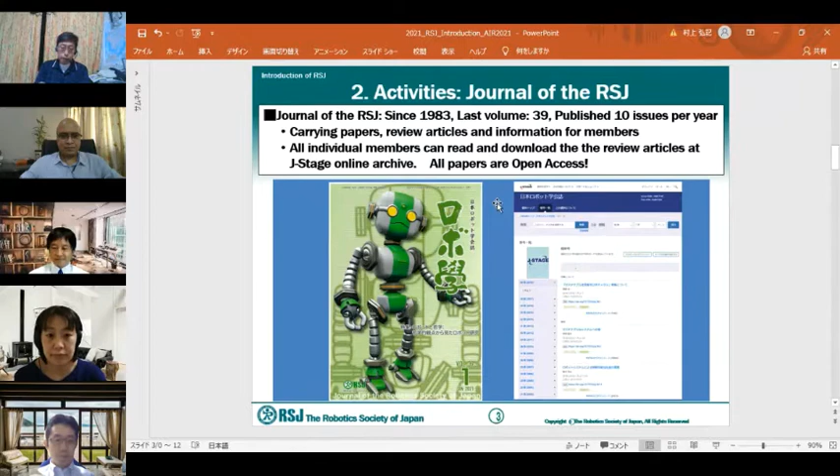Advanced Robotics, the International Journal of the Robotics Society of Japan, has been published since 1988, and is published by Taylor and Francis.

This journal is subscribed to by many libraries, so please use it for research on previous research. And the submission fee is free, and AR gets the impact factor, so please submit your research results.

The RSJ annual conference and collaborative symposium is held in Japan every year. But unfortunately, 2020 and 2021 became online conferences due to the influence of COVID-19.

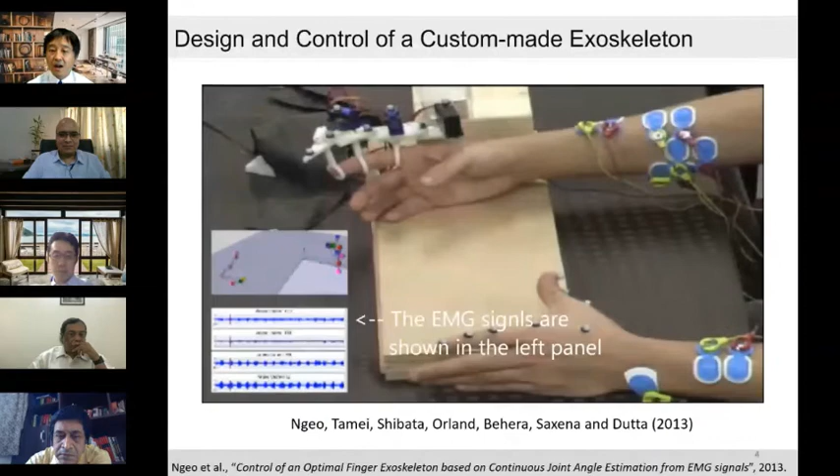This is a typical good example of our collaboration. We are good at working with EMG signal interpretation, and Professor Dutta's team was good at producing this 3D printed finger exoskeleton for rehabilitation. We collaborated together very well, and we also printed this exoskeleton at NAIST, where I was an associate professor at the time. In that way, we did a very good collaboration. I was really lucky. Thank you very much, Ashish, again.

I hope many of you know Yaskawa Electric Corp, since it also has a division in India, and they hold some of the best industrial robot cells, with one of the best market shares in the world. Kyutech was founded by the Yaskawa family, 100 to 110 years ago, which is why I'm telling this. Yaskawa's headquarters is in Kitakyushu City, and of course we collaborate very well with them.

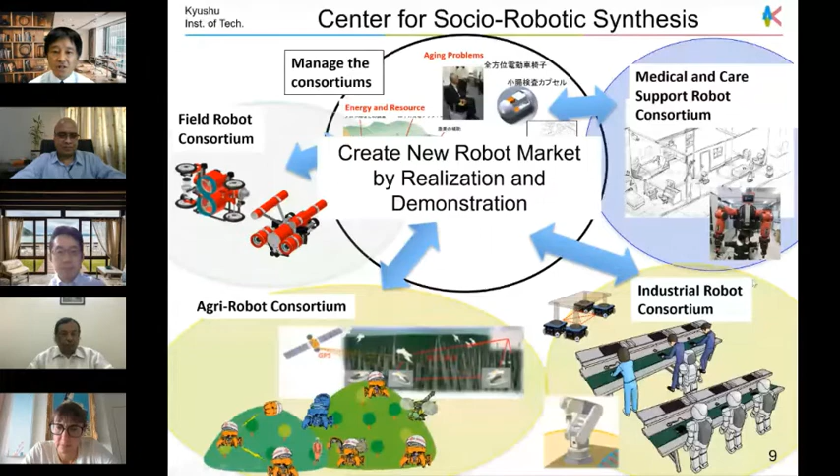Unfortunately, I don't have time to explain them in detail. Just I'd like to mention, our center has been working with holding many different types of competitions. This is actually a world competition that's also organized very well, strongly initiated and supported by Professor Asada.

That's Robocup, and we are good at football playing robots. But also here I'd like to introduce our service robot briefly. Hibikino-Musashi@Home is a student circle, and they're really strong. This is a robot given by Toyota, and the student team has been working with intelligence, and actually they won 3 times: 2 in this Robocup at Home, and 1 in World Robot Summit conducted by a Japanese ministry.

Let me move on to this slide. Due to the significant problem of super aging in Japan, we are having a shortage of caregivers and workers in many areas. This slide focuses on healthcare, and different robots and technologies are needed for different health conditions. You see wearable sensors, walking assist devices, motor learning assist, dressing assist, advanced home life support. Shibata Laboratory has been working on most of these robots and intelligent robotics.

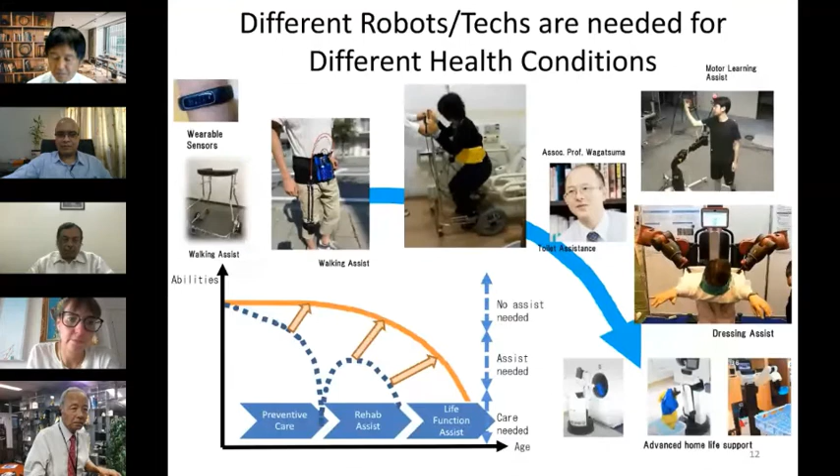My recent talks are actually available on the net, so please visit these sites. One was a first webinar given for TRS, and my title was Robots for Assisted Living. Another one was an opening talk I gave for the ICRA 2021 workshop entitled Learning for Caregiving Robots.

Now please visit. So I just want to finish my part by introducing the young researchers, the young promising researchers. One researcher is Professor Shuhei Ikemoto, and actually he was a student of Professor Asada in the past, and also Professor Hosoda, and joined Kyutech 2 years back.

He's interested in biological inspired systems and robotics. You can see these robots, pneumatic actuated robots. He's interested in these bio-inspired systems, and he's developing robots and algorithms that work for realistic, complicated tasks. Actually, these movies are a relatively old, and he's already developed a very new, interesting, exciting robot already, but seemingly it's secret -- he didn't give me a new one. So please visit his website.

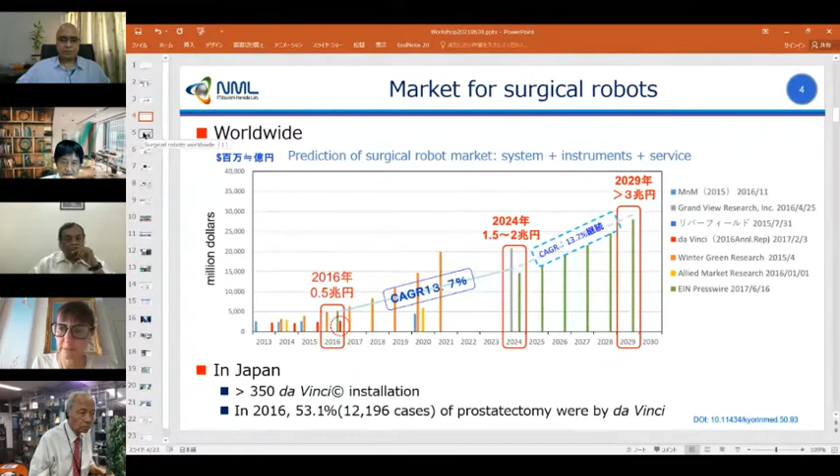Da Vinci is the most famous surgical robot, but there are many surgical robots clinically used worldwide. For example, this is the Mako Stryker for hip joint replacement and also knee joint replacement. These are also reimbursed in Japan.

This robot is for percutaneous coronary intervention, developed by a company named Corindus. But this was recently acquired by Siemens for $1.1 billion. It's a lot.

So starting a surgical robotics company is not such a bad thing. This has been approved by the Japanese authority and also installed in a Japanese hospital. This one is also a famous one called Senhance. Da Vinci is without haptics, but this one is with haptics.

This one is called the Hugo system, developed by Medtronic. Medtronic is one of the biggest companies in the healthcare industry, and it was great news for us that they decided to join this surgical robotic market.

There are also some new systems. This is by Auris Health for lung cancer applications, and this company was also acquired by Johnson & Johnson for $3.4 billion. This one is called the SPORT Surgical System by Titan Medical.

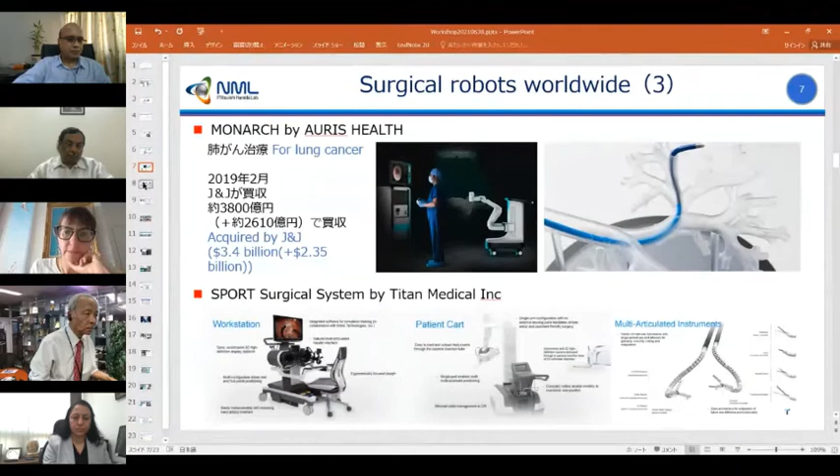Of course, we also have a long history in Japan for surgical robotics. There are some robots, for example this one is for liver surgery, and this one is for HIFU, high intensity focused ultrasound, for pancreas surgery without incision. And this one is a robot to hold a surgeon's hand, because in neurosurgery, operations can take 5 or 8 hours, so they developed a robot to hold their hand.

This one is by Keio University, designed to insert all robotic tools from one incision in the belly button; this type of surgery is common for cosmetic reasons. Olympus is also developing an AI-navigated endoscope system. And we also have a new company called Medicaroid, who recently announced their new robot called Hinotori. It's kind of like Da Vinci, but it's a Japanese original robotic surgery system.

Da Vinci is very famous, especially for its urological application. But this graph shows a trend for the procedure, and you see that the application in general surgery is increasing—for lung, liver, kidney, etc. And now Da Vinci is considered to be a platform for telesurgery.

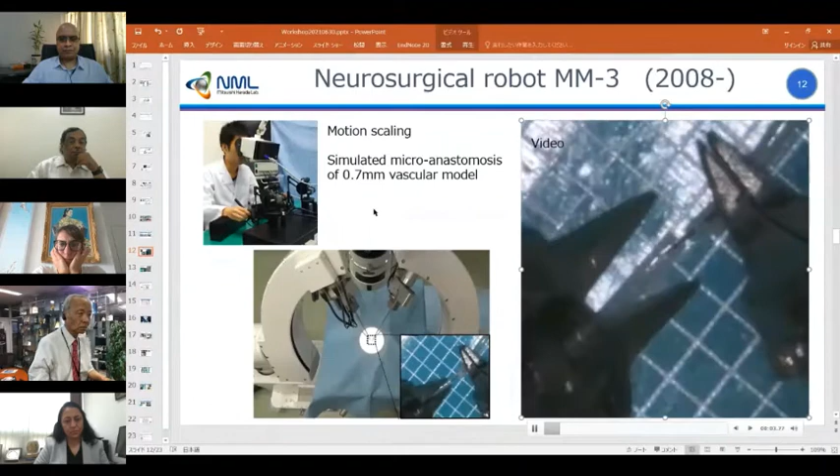We have been developing this microsurgical robotic system for microanastomosis using telemanipulation control. You see that this square is 1 millimeter, and even an engineering student can anastomose the 0.7 millimeter vascular models. This task is quite difficult even for an expert surgeon.

Today I also want to introduce our project called Bionic Humanoids Propelling New Industrial Revolution. It has already concluded, but it was a big project with a budget of $40 million US. In that project, we proposed high fidelity dummies equipped with sensors for quantifying surgical manipulation, and also for replacing or reducing trials on animals and patients.

We also developed the smart arm, a surgical robot to demonstrate that the bionic humanoid can accelerate the research and development of medical devices. So I want to show this video, and I hope you can hear it.

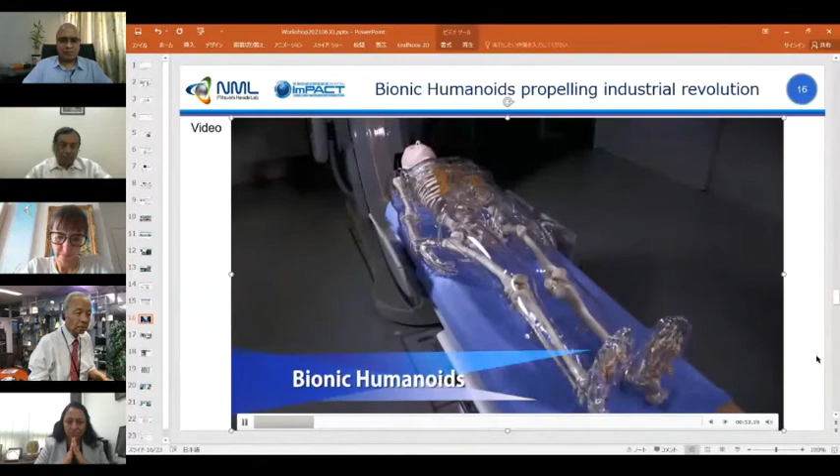So this is a summary of our project. I was program manager of this ImPACT project, and we proposed to develop dummies to quantify ambiguous sensory information to accelerate medicine-engineering collaboration. This is the bionic humanoid—maybe the term bionic can be misleading, but we propose to develop accurate dummies that can replace patients.

This is Professor Ayusawa, who was in charge of developing the bionic humanoid for eye surgery. This one is called Bionic Eye. In fact, it has been commercialized by Mitsui Chemical, so if you want, you can buy this to study the eye surgical robot. We successfully replicated the membrane in the eye ground, and also the eyeball's mechanical property.

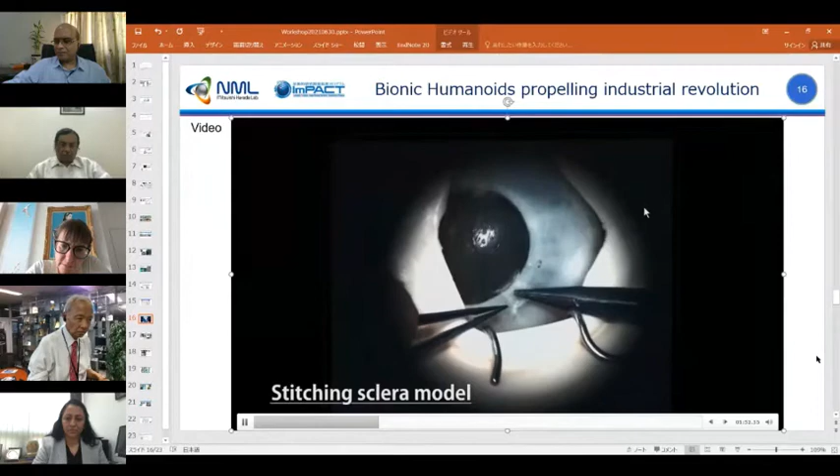This is an eye surgeon demonstrating the surgery, using the sclera model that duplicates the mechanical property of the human eyeball and sclera. This is video of another surgery to remove the membrane on the eye ground, where we replicated the mechanical property of the eye ground.

As he says, in eye surgery the patient is awake, so you cannot say 'oops,' or tell young surgeons that it's a mistake.

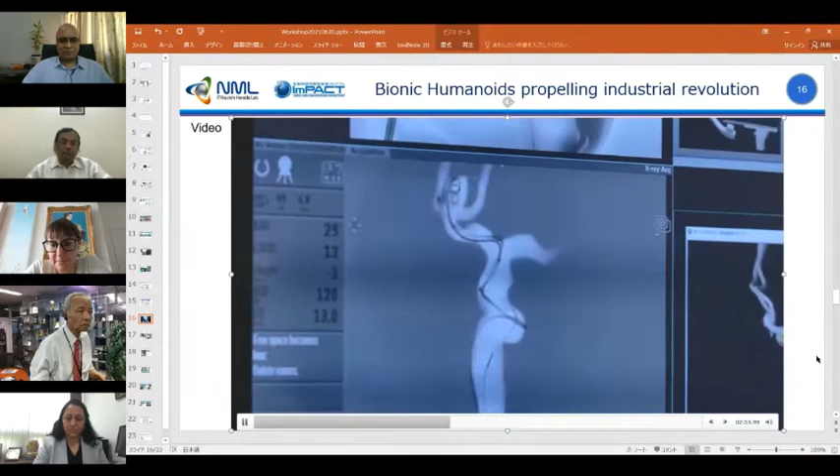So it's very difficult to educate or train young surgeons. He said the eye surgical model is helpful, and this model is for vascular surgery, for catheter therapy. We measure the mechanical property of human vessels, then replicate that property using artificial materials. We placed several sensors along the vascular networks so the force applied on the vascular wall can be detected, including ultrasound displacement sensors and pressure sensors. He's a surgeon, and he says this model is quite similar to the patient in terms of tactile feedback. This model can be used for training and also for the development of catheter robots.

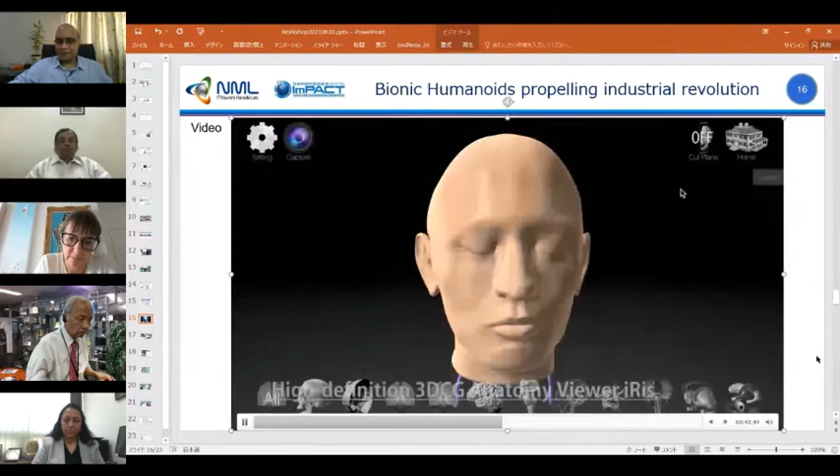This is how we measure the biomechanical properties of human organs, not only the mechanical property but also the shapes. We also developed 3D anatomical models because MRI or CT are not precise enough to know the exact shape of the nerves or small structures in the brain. So we think our models have the highest definition.

This one is a Bionic Brain for the surgery of endonasal neurosurgery. This model was also commercialized by a professor, so if you want to buy it, you can get it. This is Professor Mitsuishi, and I belong to his laboratory.

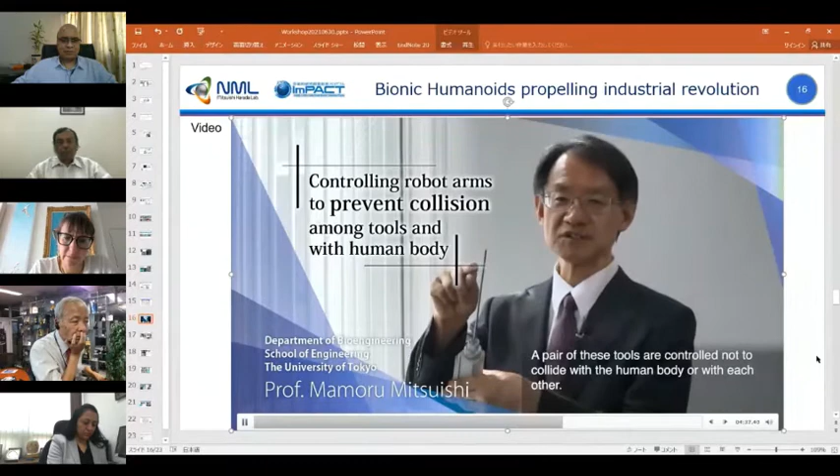We developed robots that can reach the brain tumor through the nostrils. He's a neurosurgeon, and he is operating. You see that one endoscope and two surgical robots are inserted from the nostril to reach the area that cannot be reached with straight tools. This demonstrates dura mater suturing. The dura mater needs to be sutured after the removal of the tumor. This is another type of user interface for co-manipulation.

Okay, so I stop here.

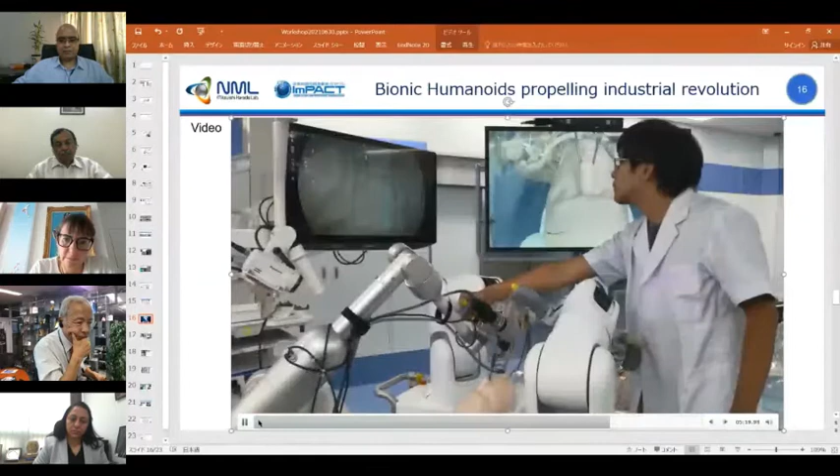So this is a smart arm shown in the video. This is the target area in the skull base, which is very difficult to reach with a straight tool. We developed a very small tool. This is a DaVinci tool, it's 8mm, and we developed a 3.5mm tool.

By changing the tools, we can use this smart arm for other surgical applications like vitreoretinal surgery and eye surgery, and also pediatric thoracoscopy for neonatal patients. This video demonstrates dura mater suturing. This is the final demonstration of the robot.

Thanks to the Bionic Brain, we can compare the performance between robotic suturing and suturing without robots. We found that the robots are more accurate and adequately efficient and safe.

Speaking something I cannot listen to. You cannot listen to me? Ashish, can you listen? Yeah, it's okay, I can hear. Oh yes, okay, so can that hear? My problem, sorry. Yeah, I am able to hear. Okay.

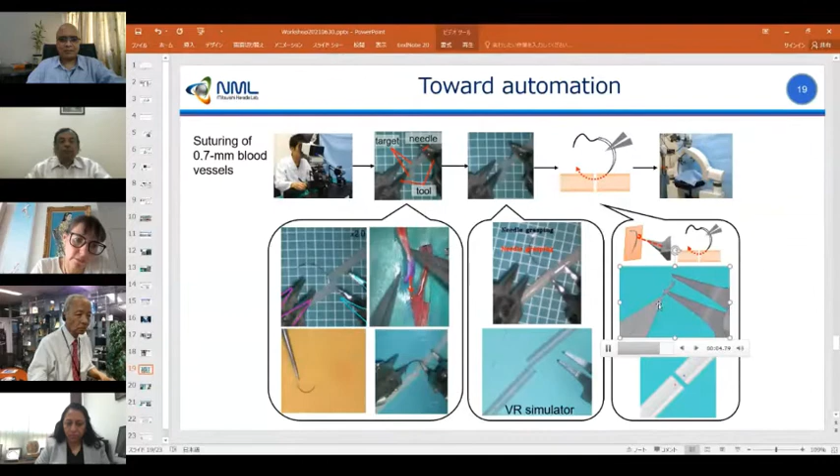We also developed and used AI to detect the phase of the surgery, for example, now you are grasping, now you are driving the needle, etc. Then we want to provide assistance, for example, to optimize the angle of the needle. This is the angle that the expert holds the needle, so we automatically rotate the left hand so that even a novice surgeon can hold the needle like an expert.

We are also developing a virtual reality simulator for vascular surgery, because it's difficult for us to collect real robotic data for AI to learn. So we use virtual reality data to collect data sets or to test our new control.

This one is for microanastomosis, and this one is for eye membrane peeling. We are also using reinforcement learning to optimize the peeling angle or peeling velocity.

Now we have been moving toward non-surgical applications as well. This is for pathology grossing robots, and this one is in collaboration with the Japanese Space Agency. We want to send this robot into the space station to perform animal dissection autonomously using AI, for example, to observe the progress of the dissection and to automate the robotic cutting.

And now it froze. So I think now my presentation is okay.

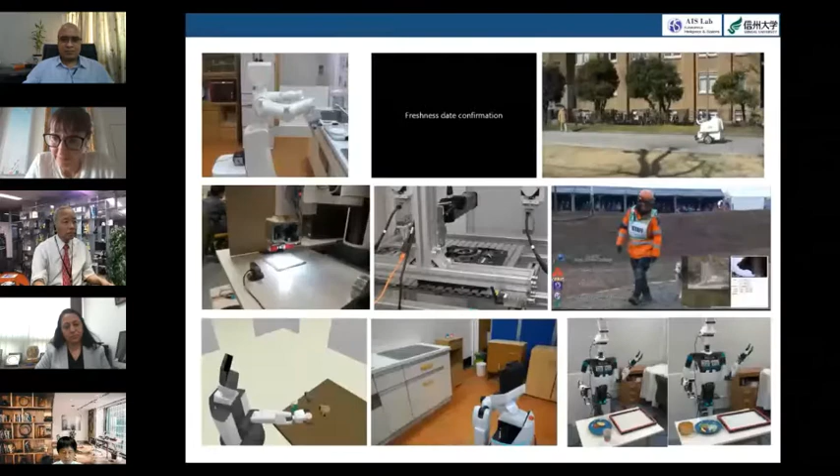The title of my talk today is Prediction, Estimation, and Learning for Deformable Object Manipulation. My main research field is intelligent robotics. This slide contains videos of some research results: housework support, mobility support, factory automation, and disaster response robotics.

Okay, sorry, I'll make the laser pointer. Can you see the pointer? Okay, yes. Another research area is motion planning and task planning, also my research field.

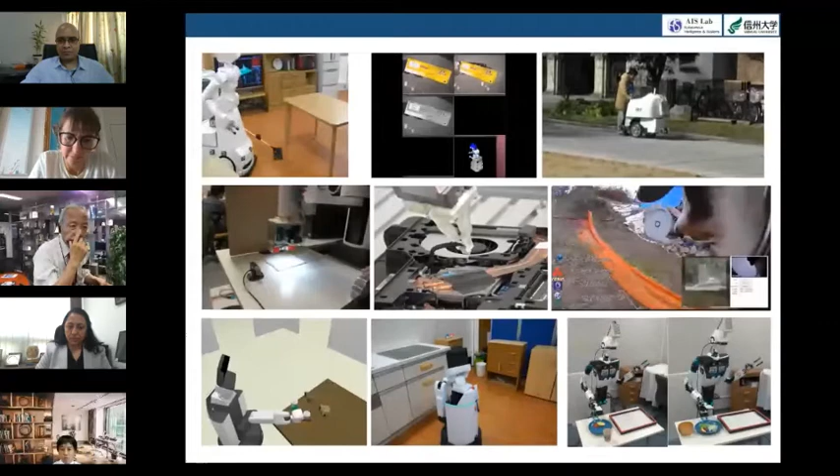Before getting into the main topic, let's organize object manipulation by autonomous robots. If the robot copes with rigid objects, the conventional approach is like this: the robot obtains object information in the real world, then inputs the results into a virtual world. After that, the robot plans and verifies its behavior in the virtual world, then executes the result in the real world. Here is a case we implemented more than 10 years ago. This is a conventional approach.

Well, this time we consider deformable object manipulation. If we use a virtual world, it's natural to think of using computer graphics technology. In CG, fiber and woven structure are simulated. This can be called a forward approach, and we may use this technology. However, the problem setting in robotics is different—robots have to estimate object state from sensor data. This is an inverse approach, I think. There are difficulties such as long processing time, low success rate depending on initial conditions, and so on. It's difficult, but very challenging and interesting, I think.

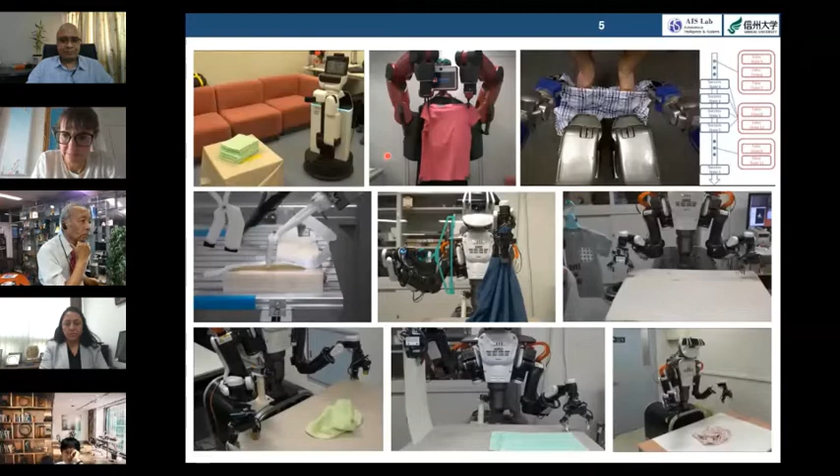So this slide shows some research results about deformable object manipulation: picking up a product without collapsing it, holding and dressing, cable wiring, putting a hanger in shirts, and so on. We have developed various functions and system integration for deformable object manipulation by autonomous robots like this.

Sorry, I misunderstood the concept of this workshop, but I will start a pretty technical talk from now. From here, I'll introduce our proposed approach in somewhat more detail.

First, we conceptualize deformable object manipulation as shown in this figure. Before manipulation, the goal state is given, then sensor data for the initial state are obtained. To realize the goal state, we must plan the manipulation procedure, including any midway state. We refer to this level as the plan scale. Then we carry out the planned procedure one manipulation at a time. We refer to this level as the manipulation scale.

To realize manipulation as conceptualized on the previous slide, we are building a dual level system as shown here. In the plan scale, overall motion plan, including midway state generation, is performed. In the manipulation scale, the cloth shape is predicted and controlled by appropriate perception and manipulation, which are an online process. Here, we introduce EMD-net—this is a modularized neural network: encode, manipulate, decode network.

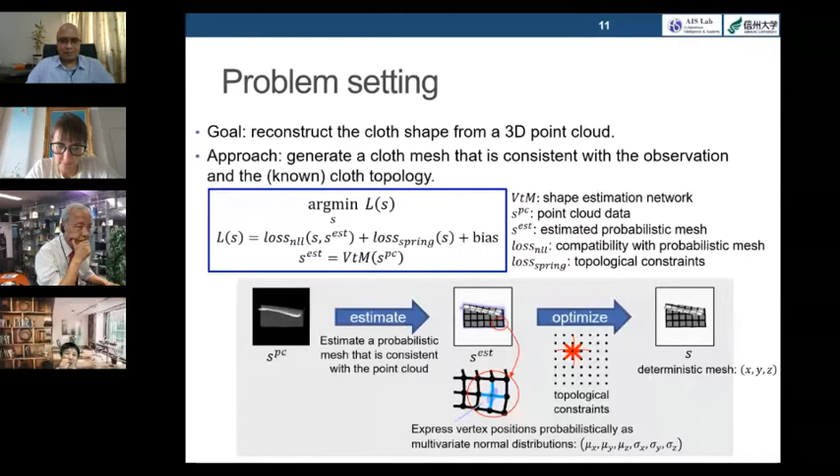First, we obtain 3D point cloud data, SPC, from the sensor. Then we convert the point cloud into a voxel representation. At this time, we boost Z coordinates to capture more height detail, such as cloth wrinkles.

Then we estimate the cloth shape probabilistically using the voxel to mesh network. We call this VtM net for short. The input of the VtM is the voxel representation, and its output is a probabilistic cloth mesh. The probabilistic mesh format describes vertex positions as 3D multivariate normal distributions.

Finally, we derive a deterministic estimate using a topological refinement procedure. By minimizing the vertex position negative log-likelihood, we ensure consistency with the observed shape. And by minimizing a topological loss, we improve the realism of the estimated shape.

Next, I will explain trajectory correction. The goal of trajectory correction is to make the manipulation outcome S sub n match the goal shape S star. To achieve this, we predict the outcome and adjust the trajectory so that the prediction matches the goal.

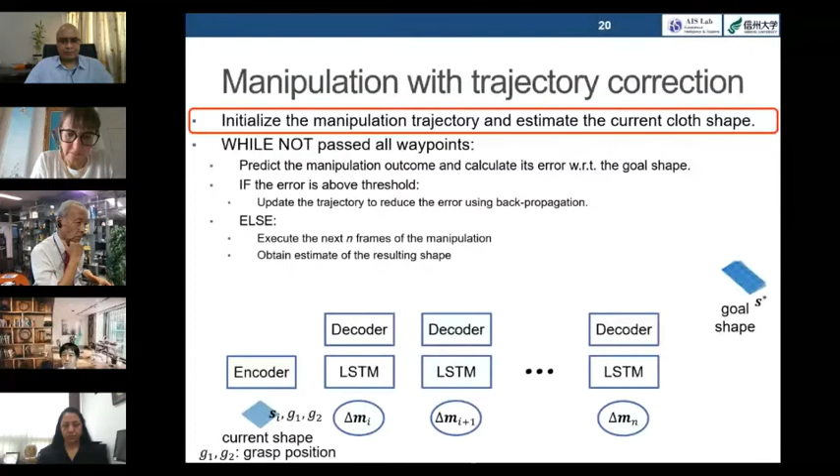Manipulation follows the following procedure. First, we predict the final manipulation outcome and calculate its error relative to the goal shape. If the error is above a threshold, we trigger trajectory correction, revising the trajectory to reduce the error using back propagation through a prediction network.

If the error is below the threshold, we execute the next n frames of the manipulation and obtain a new estimate of the resulting shape. By repeating this procedure until all waypoints of the trajectory are passed, we manipulate the target object into the goal shape.

I will introduce our experimental results. We evaluate our method on a cloth-folding task. We first evaluate all three functions in simulation, and then test the integrated system in hardware experiments. Our dataset consists of over 3,600 manipulation sequences generated using the ArcSim simulator.

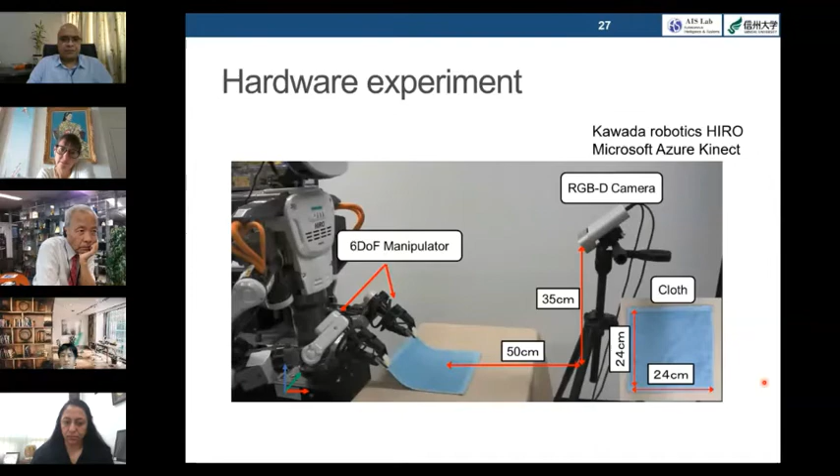I talk about deformable object manipulation by autonomous robots. Especially, I introduced a framework integrating shape estimation, shape prediction, and trajectory correction. As future work, I need a deep understanding of deformable object manipulation. Then we have to propose and verify the methods suitable for autonomous robots. That's all, thank you very much.

Thank you, Yamazaki Sensei. It was a very interesting talk, a technical talk. We have a lot of students and researchers also in the audience, so it's very good for everybody. Thank you for your interesting talk. It's a difficult topic, modeling deformable material, that's a difficult topic actually. So thank you for your talk again.

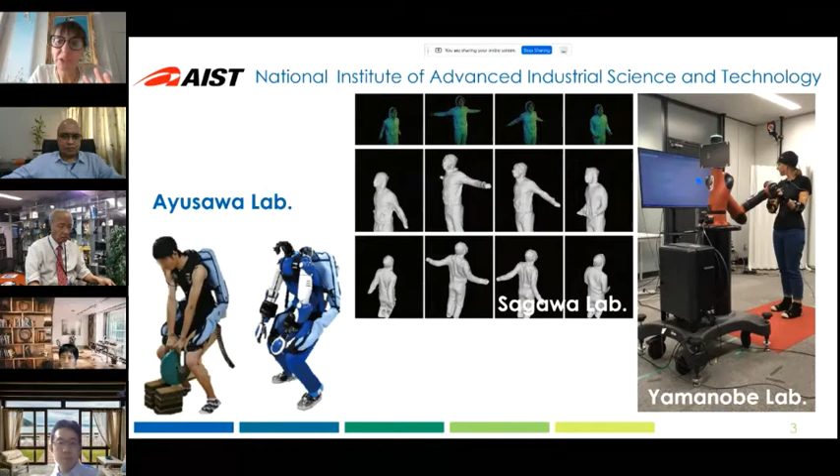So that's the main labs we have at AIST dealing with robotics. I wanted to introduce you very briefly some of our research activities that are related to many of these labs, and it starts with dynamics.

This is going to be a little bit technical, but very briefly: the idea is to work with the equations of motion. You should see an F here for external forces, but it's cut off. This equation of motion works for any kind of multi-body system, whether it's a car, truck, robot arm, humanoid robot, or the human.

The idea is, how can we use this equation of motion for the human? And in particular, how can we have access to dynamics information? The idea is to use movement.

Basically, we need to measure the movement of the system in 3D space, the movement of each individual part of the system with respect to each other, and then we need to measure forces. If we have access to this information, it's actually very easy now—we have multiple sensors that can do that, either expensive lab-grade motion capture devices, or as presented previously by Professor Yamazaki, Kinect, small IMU sensors, smartphones, and very cheap force sensors.

With this information, we can calculate the dynamics properties of the system. For example, we can measure the mass, the inertia tensor, and the position of the center of mass, the first moment of inertia. These can be applied to many different types of systems.

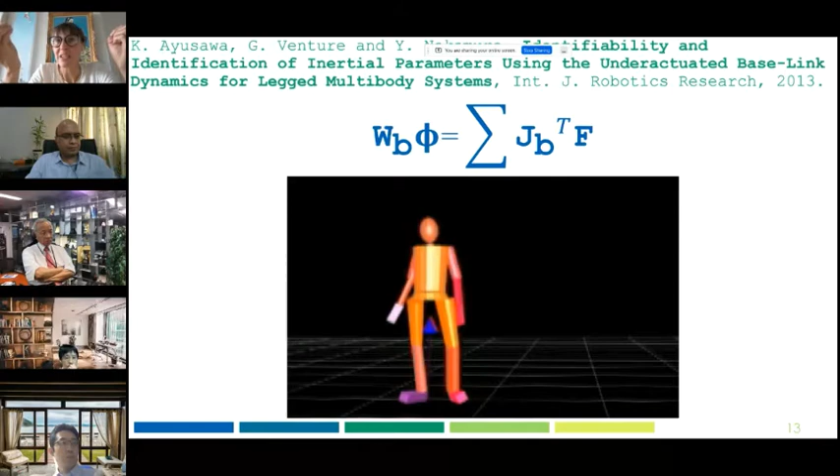Looking at what we did with humans, we created a similar way to systematically generate optimal exciting movements—we call this 'dance,' because it looks like the robot is trying to dance—to maximize the number of data points and the quality of these data points, so that we minimize the error on the identified values.

We have a robot that can generate all the movements fully by itself, and the algorithm takes into account balancing problems and self-collision problems. The robot stands on one foot, then moves to the other, generating all the movements required to minimize the error on the dynamics parameters we want to identify.

Some applications of these precise models are, for example, to get rid of force plates, because normally we need access to force information. But in many rehabilitation settings, actually measuring force is quite a problem, particularly in multi-contact conditions. For example, in sit-to-stand exercises, these systems have contact at the hands, contact at the buttock, and contact at the feet, and we need to calculate how much force is on each contact point.

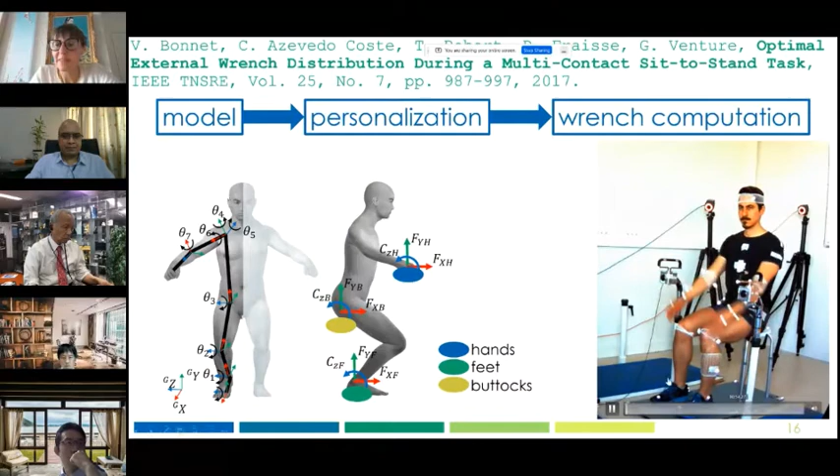This is an example here where we're doing the data optimization. Once this is done, the person is going to do some sit-to-stand task, basically standing up and sitting down, stand-to-sit and sit-to-stand tasks, which are often used in rehabilitation.

So that's basically some of the results. If we compare the forces that are measured, we can see that we have a fairly good ground reaction force estimation in all directions, even when they're very small. So we are fully equipped for full body dynamics analysis for both robots and humans.

The next thing we've been interested in is trying to generate novel models and to classify models from forces. I said forces might be difficult to measure in rehabilitation settings, but on the other hand, forces are quite easy to measure when we are sitting on a chair during the whole day, or seated on a wheelchair for our whole life. So we've been using force measurements to do classification of motion, motion recognition, and motion evaluation.

We've used it for sports activities and different types of exercises, including baseball pitching evaluation. We've also been doing wheelchair-ridden activity recognition, to try to provide feedback to patients and therapists about wheelchair-ridden patients and their activities during the whole day, week, or month, and about changes in their behaviors or movements.

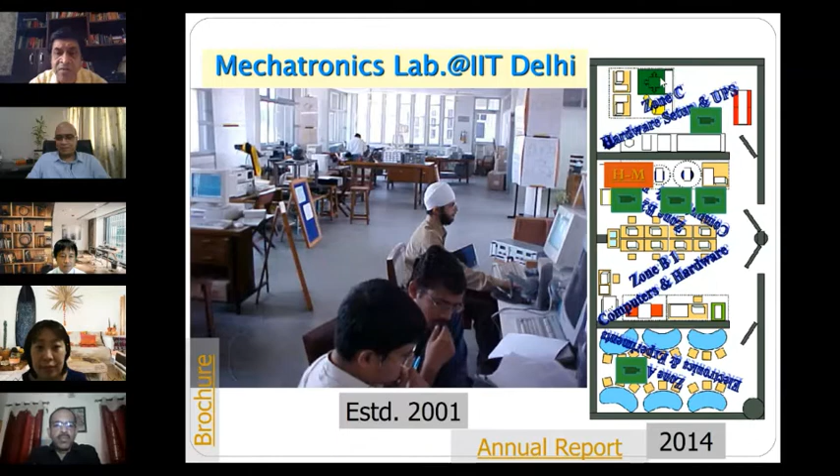To begin with my experience, as directed by Professor Dutta, I will talk about robotics at IIT Delhi. My experience with robotics at IIT is from 2001, when I started the mechatronics laboratory here.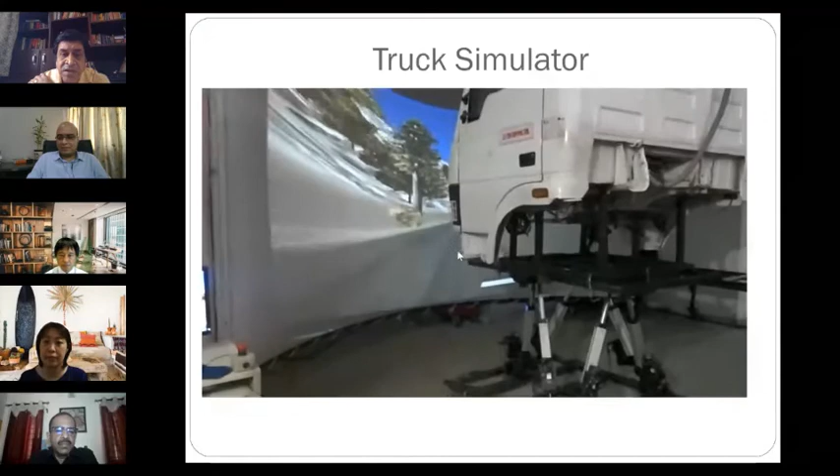I just wanted to show you a device, a simulator which we developed as a truck simulator for our Indian Army. This manipulator, the motion platform, is basically a Stewart platform, a very popular device used as a flight simulator. But here the target was a truck simulator. Complete kinematics, dynamics, and motion planning was done at IIT Delhi. Later it was taken to the site in Hyderabad, which is kind of south of India, and we did the integration there.

When we were developing that truck simulator, which was about 1 ton payload capacity, we were also playing with these kinematics to understand the control and other aspects. So we developed a small device for which we later found an application with our professor in biomedical engineering for etching implants. You can see how the laser spot has to be traced along the implant. So a nice offshoot application, and now this is so cute and so useful for education. We are making it available for other researchers outside IIT Delhi as well.

Then comes 2010. We had a sponsored program from our Atomic Research Center at Mumbai, and we created a program called Program for Autonomous Robotics. That was led by Professor Santanu Chaudhury, whom you met in the morning. He was a faculty at IIT Delhi, leading this activity where about 12 faculty and 20 students took part. We developed several technologies, and I will show you maybe 1 or 2 glimpses here. As part of our annual workshops, we also planned the Robotics Society from that time onward. We are very obliged to the Robotics Society of Japan as well as this project, which actually led to the formation of this society.

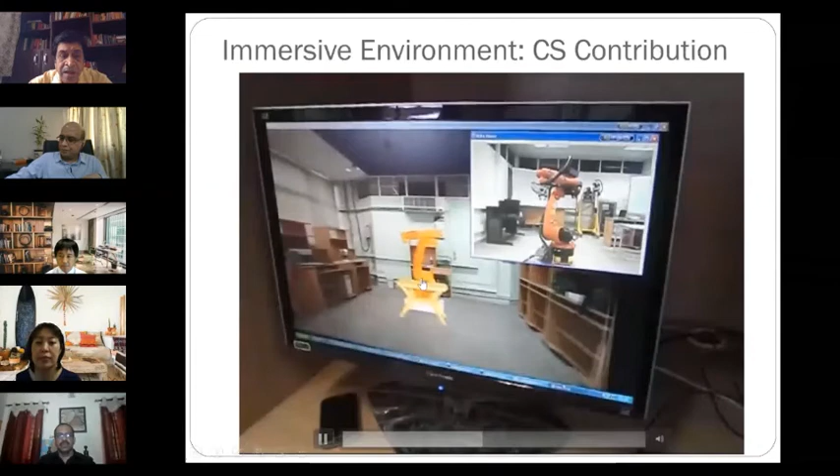This is one of the teleoperations in an immersive environment. Please watch the video. We are using a haptics device, as you can see, to manipulate a robot which is a little farther distance here on the top right. We are trying to control the virtual robot at the center of the screen, and then take care of the delays. These kinds of things have been attempted, so that whatever control is done on the virtual robot, the same signal goes into the real robot behind it. Now we are trying to adopt the technology, even though it was for nuclear applications at that point of time.

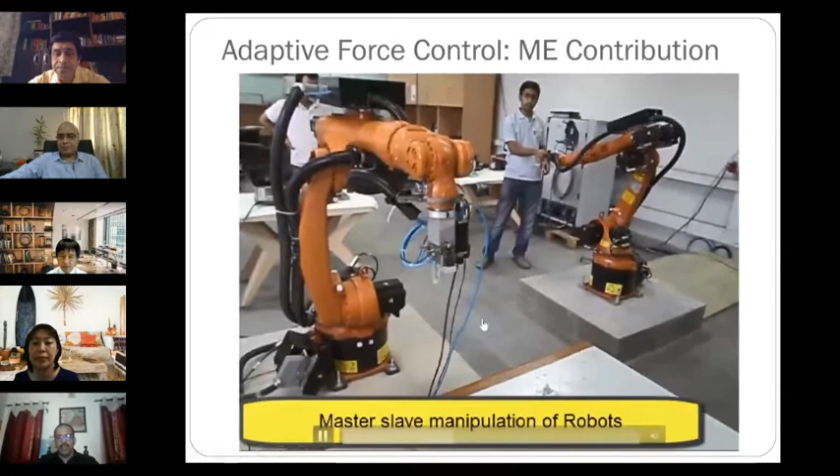Now we have very strong medical activities beginning here. I will share a few concepts or slides later on. In the manufacturing setup, assembly setup, we have this force-following robot. We know robots are typically used in cages, so we wanted to make the robots human-friendly. We are trying to take care of the current passing through the motors to have this kind of flexibility implemented. This uses 2 industrial robots, put in a master-slave manipulation mode, to understand various aspects of compliance in the robot.

We attempted the peg-in-hole operation by introducing force-torque sensors here, so that we can trace this circular hole and determine from the force plots what is the center of the hole based on the resistance coming, and then insert the component. Now the C part.

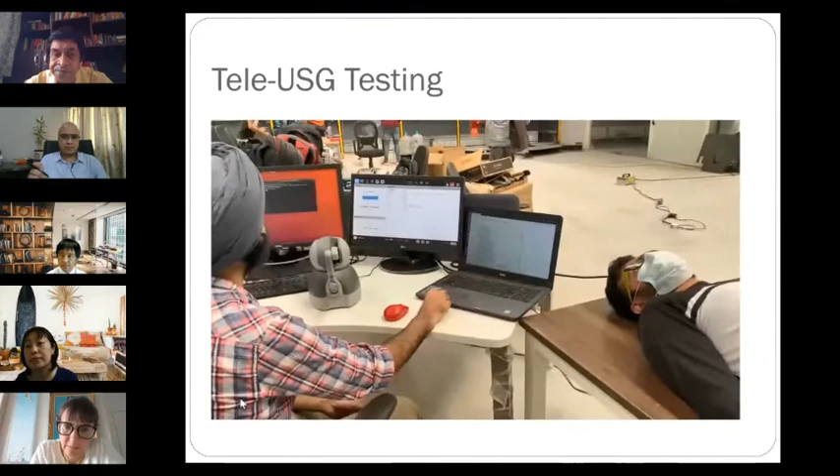One demonstration I wanted to show, which we have begun as part of this activity, is tele-ultrasound. This is the same haptics device you've seen at the beginning. So we have a cobot from Universal Robots, as you can see here, and a volunteer. The ultrasound probe is 3D printed because testing of the algorithms is still going on, and this is in the factory setup.

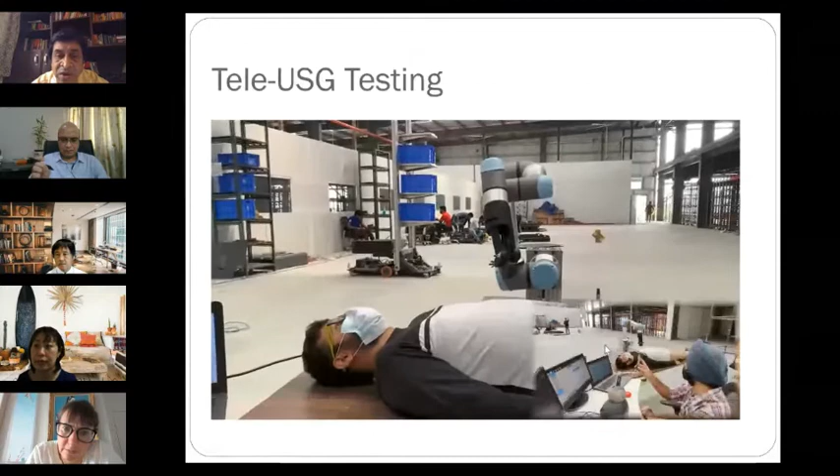Later on, it was taken to the hospital, and about 20 plus volunteers have been tested and have given their feedback. We are now in the next phase of improving it in terms of design, orientation, and the doctor's comfort, and so on. This will help us not only for the COVID situation but post-COVID also, to take this kind of healthcare diagnostics to remote places in the country as well.

This is just to mention that in India, particularly at IIT Delhi and other institutes, we have to put a lot of emphasis on education because we have a large young population. So this is my contribution towards that.

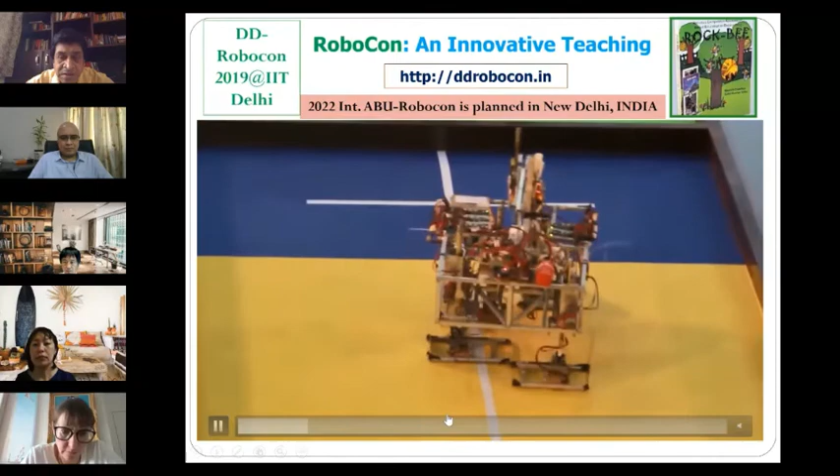The 2019 competition was held in Mongolia. Generally the theme of the game is taken from the hosting country, like 2022 will be from India. You can see the kind of challenges thrown at college students - they are enormous. This is a working robot the students have to build.

So to me, this includes all aspects of engineering typically learned in an undergraduate course, and that gives a lot of motivation to the students to learn what's next. That's the way we try to preach this very strongly.

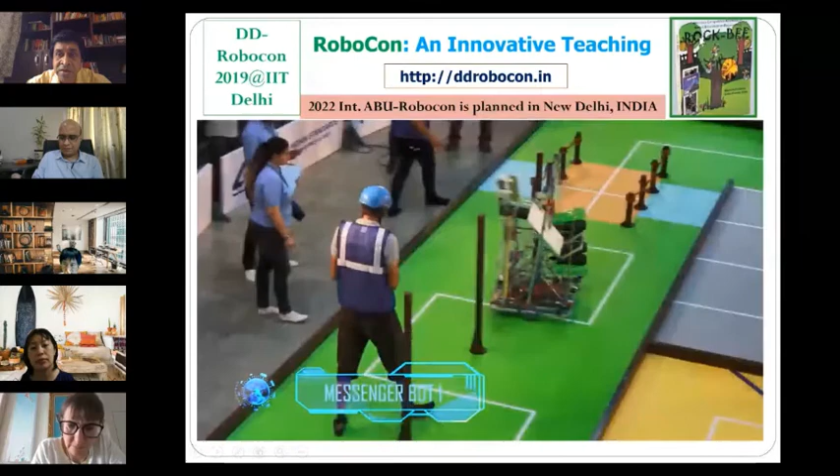In order to reach the masses, we wrote a small fiction book called ROCK-BEE - Robotics competition Knowledge-based education and Engineering. No equations here, just a story form. You can see how the robots are moving - all aspects of engineering, from concept to design to manufacturing to debugging, and at the end, strategy. The robot in front of you was a very popular team, but the other team, not so popular, won the final because of its strategy.

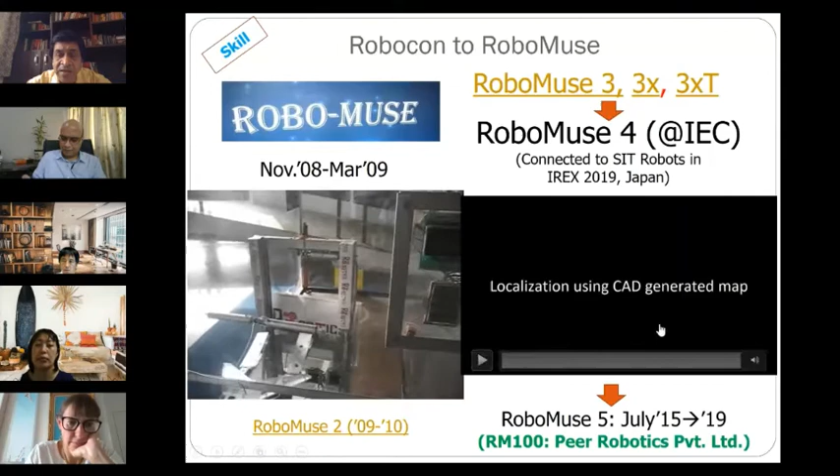And this is 2019 - we made it autonomous, as you can see on the right hand side. For your information, IREX 2019 in collaboration with Matsuhira, this robot had communication from the exhibition site in Tokyo to be able to control it. They could not fully control the robot, but certainly they could partially.

Successful, quite a nice collaboration. However, the journey continued, and in 2019, the same year, RoboMuse 5, another version of this robot, was adopted by a company in India called Peer Robotics, who claims this is a true collaborative robot, as you can see in this video. The base is the same RoboMuse 5, and you'll see towards the end.

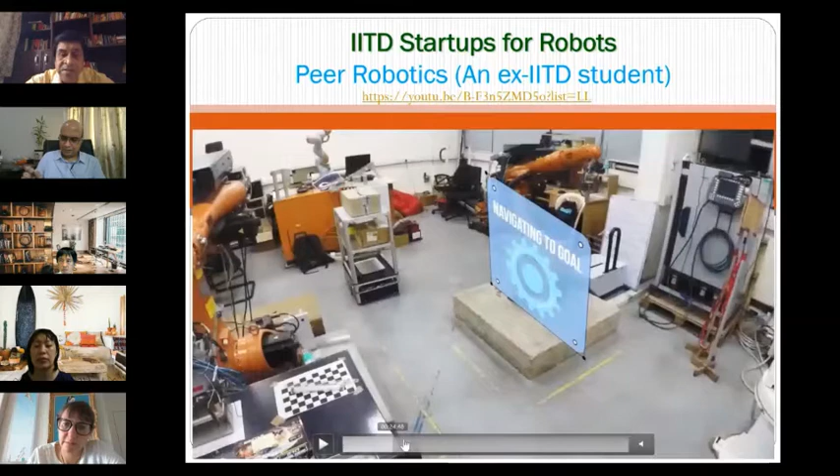I just wanted to fast forward - let's see if I can. So here you'll see someone coming and trying to push, but he will not put all his force here. Okay, let him.

You can put it in autonomous mode, or you can put it in collaborative mode. This is still autonomous mode - now it's switching to collaborative mode. The guy picks up the boxes, and here collaboration comes in - he's not exerting his whole effort, just showing the intention, and the robot is timing it. It's like a power steering system.

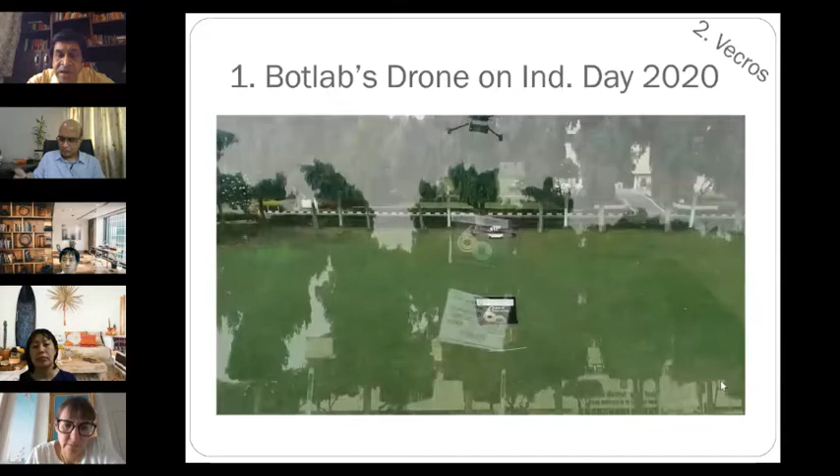So we have several other companies. There is one drone company on the campus - in fact, tomorrow they are going to demonstrate a formation of 50 drones. It's a challenge they've taken on for the entertainment and farming aspect.

This is our IIT Delhi campus. For those who could not visit yet, here's a very brief glimpse - this is an advertisement we made for our Diamond Jubilee celebration last year. This was on Independence Day, the 15th of August - you can see the flag hoisting activity happening there.

There is one more company, Vecros. So we interact with these startup companies too.

And in order to emphasize skill development, so in India we have the largest young population in the world, so we do take care of a lot of skills.

On my personal note, along with some collaborators, we have started a competition with Tezpur University, which we call self-driven, self-learning, and self-evaluating. There will be a paper on this at this conference, and these are some slides from there. For those who are interested, you can attend that session.

So with this, I conclude. I talked about mechatronics, I talked about RoboAnalyzer software, I talked about Robocon as an experience of skill-oriented learning, which I also call an innovative teaching mechanism, and ROC, RoboAnalyzer-based competition, as a skill development activity. Acknowledgement to all our friends, students, spouses, and thank you very much for your kind attention.

There seems to be some technical issue with the screen sharing and audio. The organizers troubleshoot, suggesting the speaker try using Chrome instead of Firefox, exit and rejoin, and try sharing only a single window or application instead of the full desktop. After several attempts, the presenter gets the screen share and audio working and confirms he can now be heard and seen.

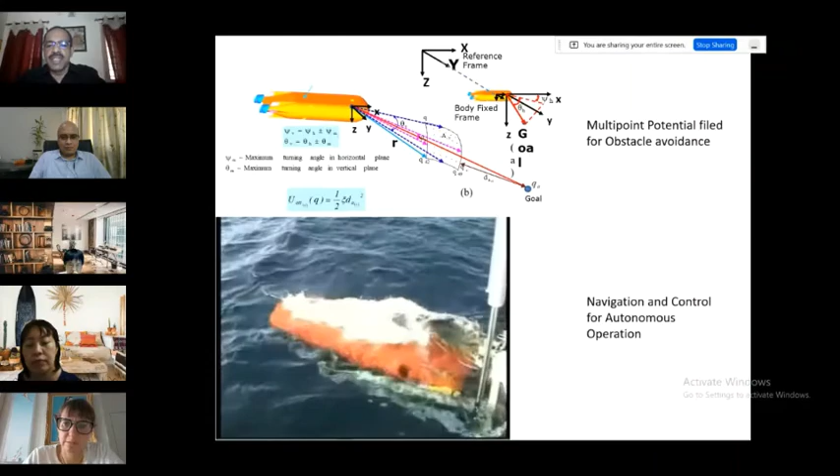So this was, and this has been published. What you are seeing on the video is the first sea trial of this robotic vehicle.

You can see that it is being deployed from the ship, and once it is deployed, it is fully autonomous operation. Once it is commanded to move underwater, it will go as per the designed paths, avoiding obstacles and following our improved line of sight method.

After that, we can collect it from the targets. This was the first trial, so very limited capabilities were tested, and this work is still going on. We are trying to improve the navigation and control aspects of these robots.

As part of the underwater robotic research, we came up with a new method for buoyancy variation. Most underwater systems use weight change as a buoyancy method, pumping water into or out of the vehicle to change buoyancy, which is a bit problematic because of seawater corrosion and other issues.

So we came up with a method of volume control, where the volume of the whole vehicle will be changed so that there will be a change in buoyancy.

As you can see in this figure, what we are using is bellows. The whole body of the robot is made up of metallic bellows, with electric motors inside that compress or expand the bellows.

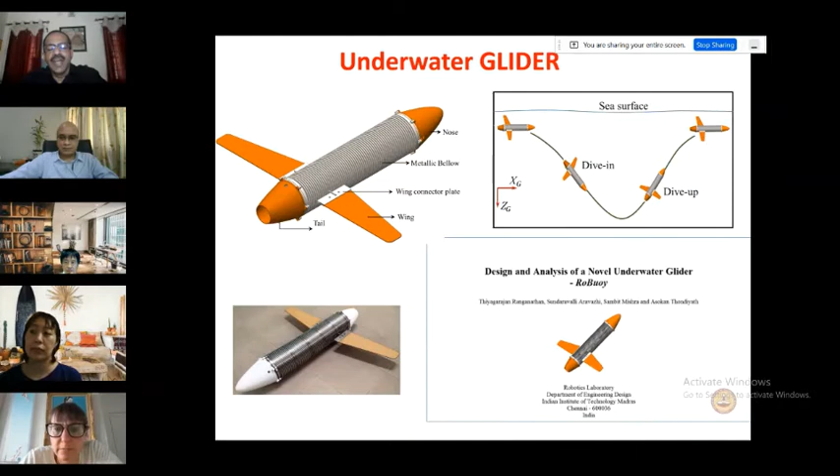So you get a change in volume, and whenever the volume changes, there is a decrease in buoyancy, so it starts going down, and when you change the volume again, it comes back up. This way, you get a sinusoidal motion for the glider, and the power required is very small. You don't need a thruster to do this.

What you are seeing here is the fabricated prototype, which we finally tested in the swimming pool to show that it actually works—the buoyancy variation is working.

Now we are converting this into a commercial product. We already set up a company to commercially develop it for commercial applications. It has high endurance because the power requirement is very low, and it is very silent—there is no thruster, so there is no disturbance to the surrounding medium. We hope this can be commercialized in a short span of time.

The second topic is medical rehabilitation robotics. Professor Kanako explained about the surgical robot and the importance of surgical robotics in the current era.

We designed a surgical robot with two master arms of 7 degrees of freedom and two slave arms of 7 degrees of freedom, with capabilities for haptic feedback and a 2D vision system.

We have a camera arm which carries the camera inside the body, and two slave arms which carry the surgical tool, controlled using a master robot, as you can see here. I'll get into the details later.

So this is the system diagram. You have the surgeon console where the surgeon sits and watches the video image, then controls the two master arms. Those master arm motions are captured, processed in the controller, and passed to the slave robot.

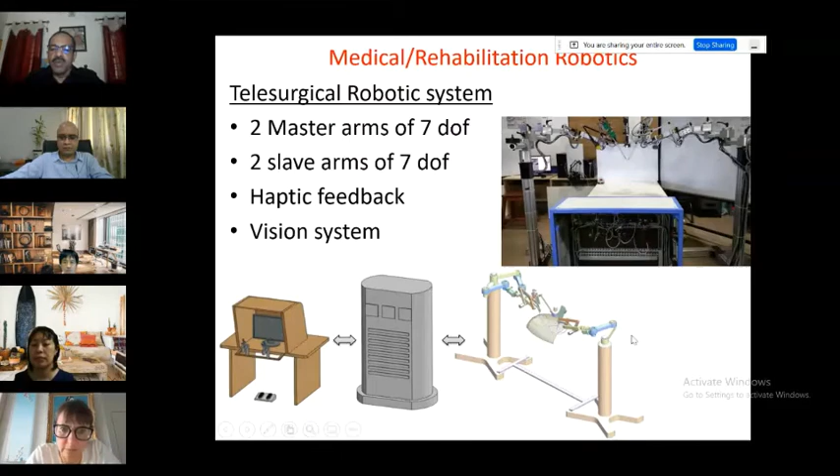The slave robot will be manipulating the surgical tool. This is the surgical tool we actually designed, our own patented design. As you can see, we have 4 motors to control the tool tip, giving 4 degrees of freedom at the tool tip. This part will go into the human body, and the tool tip can be manipulated using the master arm.

This is the final design for the surgical toolbox, and this is the master robot. It has 3 degrees of freedom for positioning and 3 degrees of freedom for orienting the tool. The surgeon will be holding onto this gripper, which is again a patented gripper design used for controlling the tool at the surgical site. We have 2 such master arms, and these motors also help us provide haptic feedback.

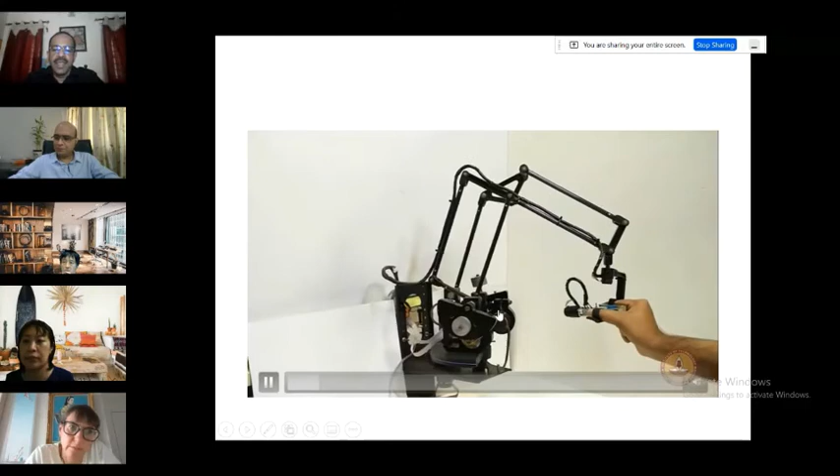I'll just show you the video of the whole system. This is the master robot, and you can see the person holding onto the grasper, which has all 6 degrees of freedom plus the grasping degree of freedom. All these motions will be captured using the encoders, and then you can find out the actual Cartesian motion of the grasper, which will be passed to the slave manipulator.

So you have 2 slave arms. This is the laboratory prototype, so it may not look very nice here, but when we convert this into a commercial product, we can make it much more attractive. This is the slave arm with a remote center of motion mechanism for getting the trocar point as the point of insertion. And then we have this surgical tool, which will go into the human body with all 7 degrees of freedom possible at the tool tip.

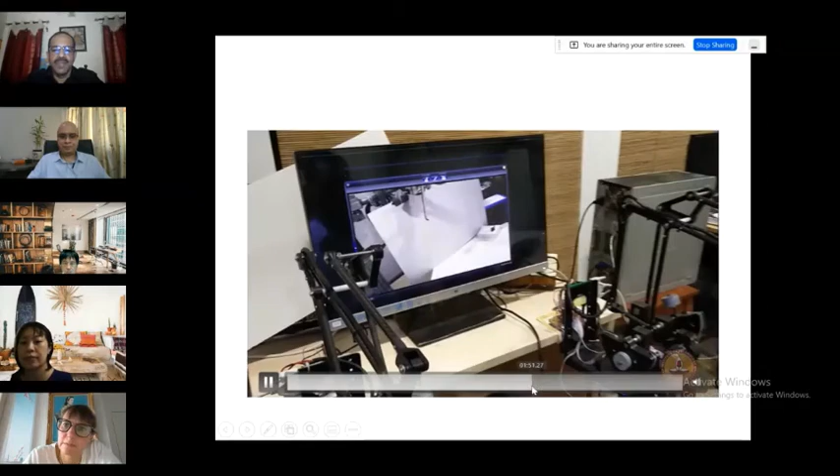And this is the master slave manipulation. So the master robot is being controlled, and the video image will appear on the screen, and then you can see that the slave robot or the tool can be manipulated as per the requirement by the operator. So this is a complete master slave tele manipulation.

So the tooltip transmission is through cable. You can see that the motors are all at the distal ends, and only this part will be inside the body, allowing very fine manipulation of the tool at the surgical site. We are now converting this into a commercial product, and with the help of the Technology Innovation Hub, or the Robotics Center at IIT Madras, we are planning to have a commercial product designed and developed in the future.

Just to show you, we have also worked on active hand rehabilitation. This is a simple device with a single motor for controlling the fingers. So those who are having difficulty moving their fingers because of some neurological disorder, this device can be used for controlling the fingers.

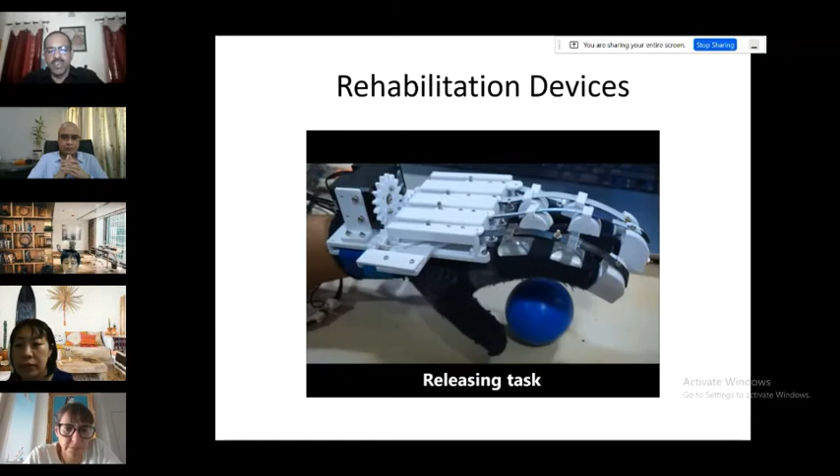Now, depending on whether we want it remotely operated or programmed, both are possible, or we can use the other hand as a control device. So there are multiple possibilities, and again we can develop this in a commercial way at a later stage.

The other important work we have taken up in the recent past is the design of multimodal robots for field and industrial applications. Multimodal robots are capable of multiple modes of locomotion, grasping, and manipulation. As you know, any industrial mobile manipulator requires the capability of mobility, manipulation, and grasping. These 3 things need to be there for any mobile manipulation.

Most of the existing or commercially available industrial mobile manipulators are actually a combination of these 3 - you'll be having a manipulator, a mobile platform, and then a grasper attached to it.

Did we lose him? We have lost him, it looks like. Professor Asokan, can you hear us?

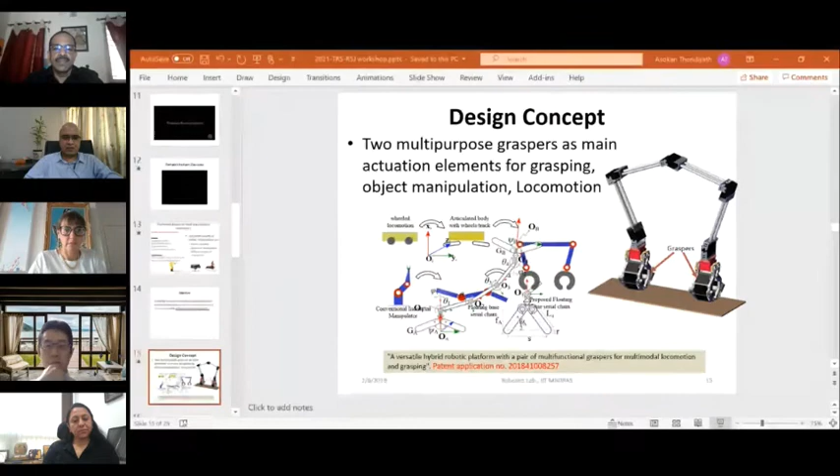Your slide is not changing. Oops. It's not changing now? Slide number 15, but not in full screen. Now we see slide number 19. Yeah, that is the one I am using. So can you see the video? No sir, we are still looking at the PowerPoint with the left side preview and the slide. Maybe within this you can play. Come out of the slideshow. Yeah, here only if you can play. Is it visible? Yes.

So we can see that now it's actually in a wheeled locomotion mode. This mode can be changed to grasping and locomotion, so you can actually hold an object and then do the locomotion. So you can do object manipulation, grasping, and locomotion. That is the first mode of operation.

And then we modified this to get the next one, the brachiation motion. Brachiation is where you hold one object using one grasper, and the other grasper can actuate to hold on to the next object. So we'll be able to get a brachiation motion using this mechanism. Grasping and brachiation can be achieved using this method.

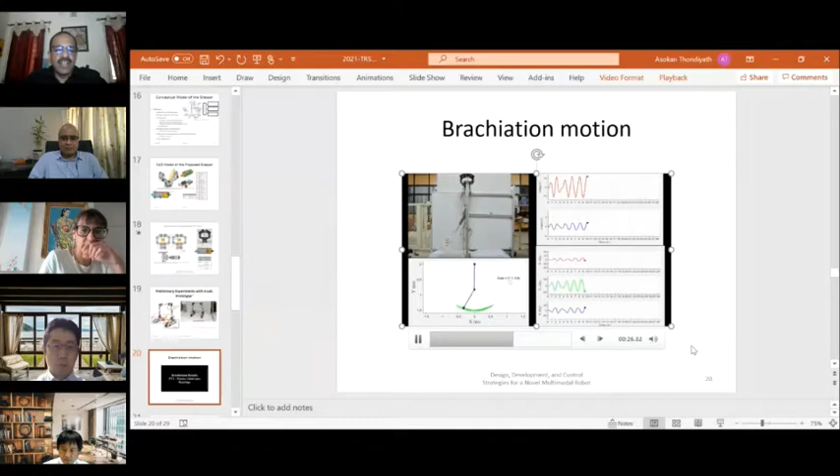And the last one we can do with this is the walking motion. You can make this into a walking mode. In walking mode, we allow the robot to stand on one leg and change its center of motion. By controlling the motion of the center, the other leg can be moved to the next position, and then we can have a walking motion for this.

So all the locomotion modes of rolling, wheeled locomotion, walking, or brachiation can be achieved along with the grasping capabilities. So grasping, manipulation, and locomotion capabilities are combined into a single system. This is further being developed to get a full walking motion. We are still in the process of developing it, and once we complete this in a full product, there will be a lot of utility for it in industrial applications.

Moving on to the next topic, aerial robotics. Most people do the standard quadrotor design, but what we have done here is a different design for the quadrotor to increase endurance or reduce the size of the robot with the same capabilities as other designs. We call this a vertically offset overlapping propulsion system, where the rotor wings actually overlap one over the other, so we can have an increased diameter for the propeller and get more power for travel. That is how we designed this quadrotor to improve the endurance.

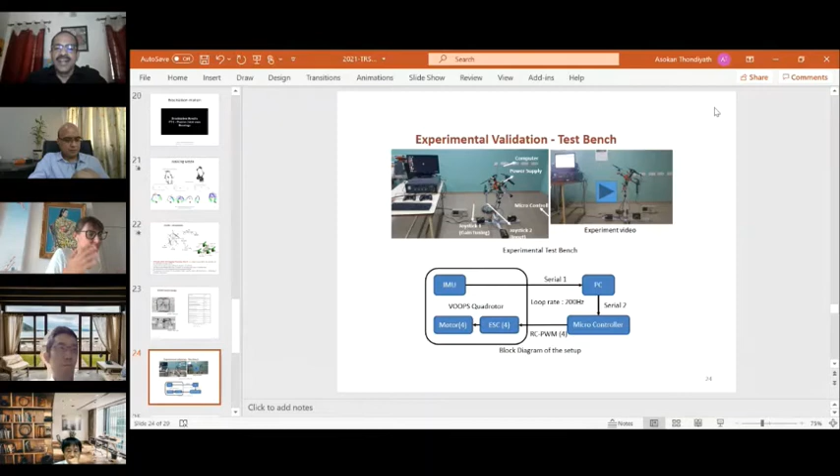We did trials within the lab for testing the losses, and finally did a test on the ground to show the capability of the quadrotor. We finally proved that this can increase the endurance. As you can see here, it's carrying a payload, showing that the payload can actually be increased by having this mechanism.

Before concluding, let me present some other related work in the area of quadrotors. In guidance, navigation, and control, this is from the lab of Professor Satadal Ghosh in the aerospace department, who is working on planning and motion control of aerial robots. This particular work shows obstacle avoidance and dynamic collision avoidance of multiple quadrotors—when multiple quadrotors are deployed, how can they avoid dynamic collision. This work relates to offline motion planning and online reactive motion planning to avoid obstacles.

This is additional work on path planning, showing target localization in 2D and 3D environments, as well as landing on a fixed or mobile platform. If a rotor aircraft has to land on a moving platform, what kind of control strategies need to be employed and developed? This work primarily looks at the landing issues.

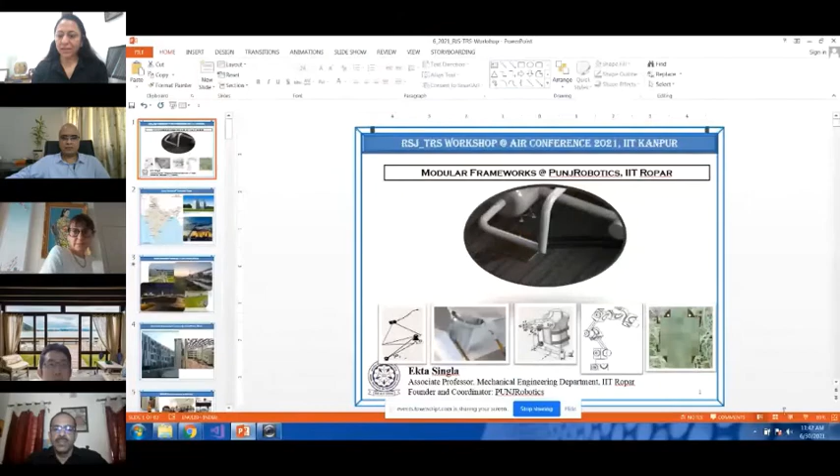Thank you very much, Professor Ashish Dutta, and everybody. A very good morning to all the Indian participants, and a very good afternoon to all our Japanese friends. It is certainly an opportunity, and I'm sure it will be great to have this sharing with you, and the rest of the 3 days will be very effectively utilized. IIT Ropar is a relatively new IIT in India, around 13 years now, so we call it a second generation IIT—relatively new compared to the other 3 speakers from Madras, Delhi, and Kanpur. That is why I've used 2 or 3 extra slides to advertise the institute, because I would like people to come here.

In totality, I'll be speaking about the umbrella PunjRobotics. That was one initiative because it was a recently established institute. When we had only 7 to 8 faculty members in the Department of Mechanical Engineering, I never found anybody who was really working exactly in robotics.

So in 2016, with the help of our RSI members themselves, we have established PunjRobotics here, which is a platform, and I'll be speaking about it, particularly the research areas related to the modular concepts we are focusing on. Of course, there are many other directions in which students and faculty members are working, but I'll just be touching upon a few.

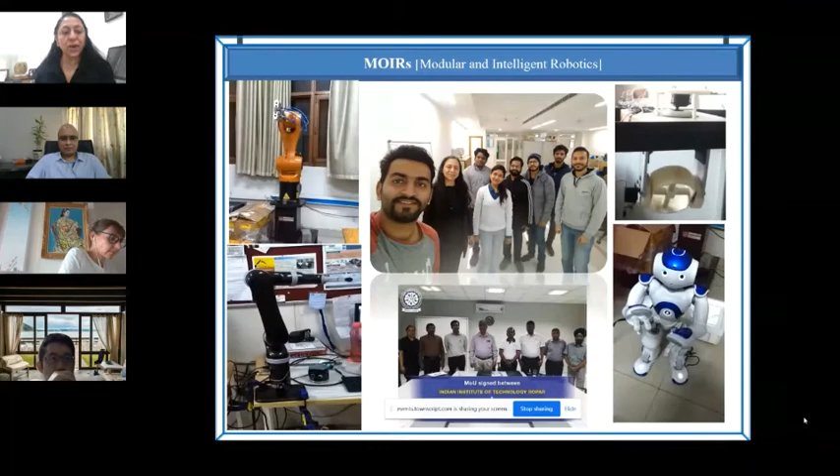Before that, about the location—I'll advertise a little more about the institute, because for our international participants, particularly the speakers, another reason you must visit Ropar, which is less likely to be popular, is that this is one of the biggest sites belonging to the Indus Valley civilization, and we have a museum here. I'm sure you'd like to add it to your next visit plans.

There are many tourism locations around, including the Golden Temple at Amritsar. More than that, we are very fortunate to have 10 national labs and institutes nearby, within an area of 30 to 40 kilometers, which helps us develop collaborations and interdisciplinary work both in medical and materials fields at a very good pace. That is why we have very good rankings, both nationally and internationally.

About Punch Robotics: in 2016, when we found that people were working in distinct areas with some idea about robotics but not knowing exactly where to start, it was important to club them together. That's when we started the PR community, which is now increasing, including faculty members and students from different programs. It is helping to uplift the sector of robotics, as faculty members working in additive manufacturing or materials—experts from different directions—are now contributing under this umbrella of Punch Robotics.

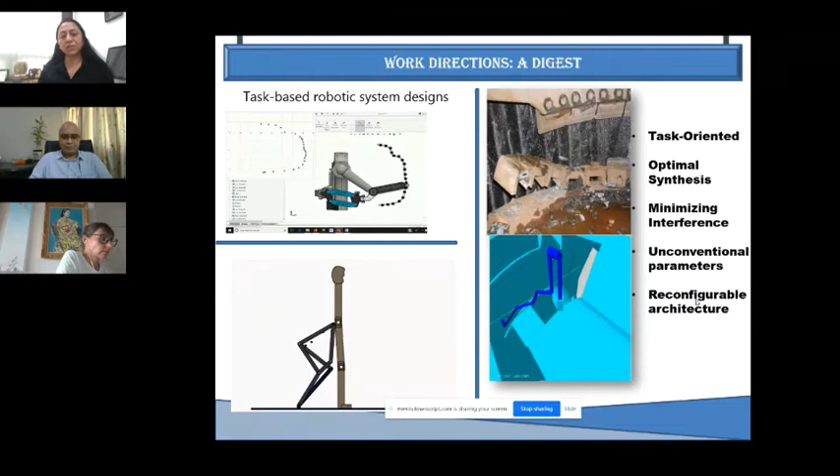As I mentioned, the other works on the right side are taken up mainly in research directions to cater to customization. For customization, we majorly take task-oriented planning, task planning, optimal synthesis, and also collision avoidance and minimum interference. We are also taking care of parameters which are unconventional in nature.

I'll show how we've used not just 0 and 90 degree alpha DH parameters, but tried to give unconventional architectures for some intricate environments. Reconfigurability is what my group has actually utilized, or explored, in the last three to four years.

First, MOIR is my own library, because I mentioned modular and intelligent robotics. MARC 1 is the modular library which I would like to propose.

This is how I started in 2010 at this institute, where in the first three to four years we were more into task-based planning, looking at cluttered environments and how we could go for redundant and modular robots. Mainly we started with redundant arms.

You'll see that for a cluttered environment, we took some realistic examples from the power sector, power plants, or our own labs, trying to see if we could develop a basic synthesizer robotic system which is redundant in nature.

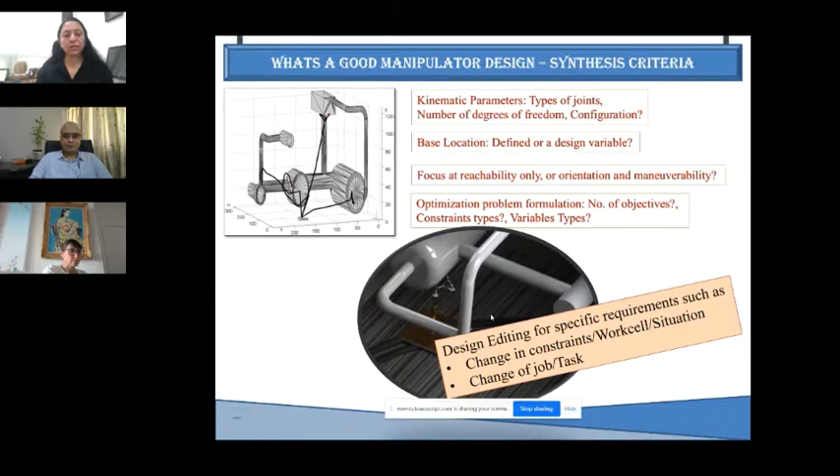But it was all getting stuck on the design side. We saw that unconventional designs were easy to show in simulation, but not really applicable when we actually needed to develop a robot, because the parameters were not exactly 0 and 90, or perpendicular to each other.

So we started our work around 2013 on the modular library, and this was the first set in which we saw how, given a particular task, we would be utilizing the system.

First, we should know, for example here - I'll use this case study because it's from my first student, 2013 to 2015-16. There we saw that if there's a cluttered environment and we look for robotic assistance and develop a system using modular robots, we first take an assumed model, as shown on the left side.

Rather than making a solid model separately, we worked on how to scan and directly use pictures to construct the 3D model. The work I showed earlier will be utilized here in this course also.

We show how we choose, using the modules we developed - the first set of modules shown in the previous slides. They came in three sets, like three types of motors, accordingly three lengths, and everything published related to that - what extent of robotic arms we would like to develop, for example up to 7 to 8 degrees of freedom.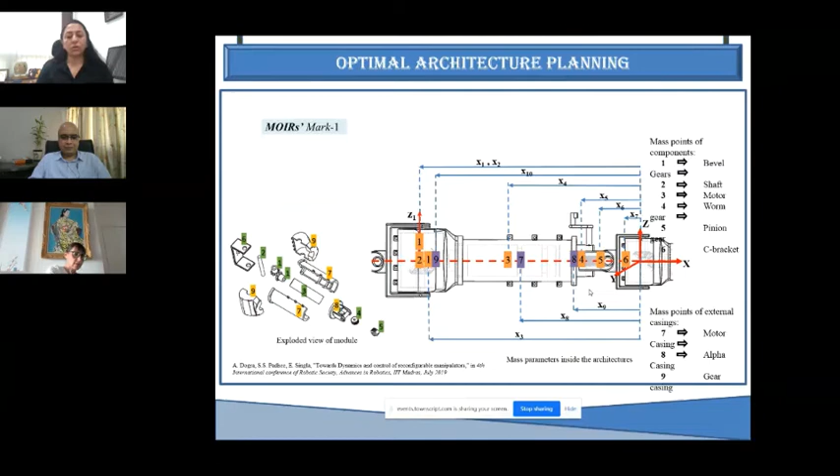So recently we analyzed, I'm not showing the details here, how the architecture of each module needs to be optimized, and we looked at it from the dynamics perspective also, because earlier we were mainly looking at the static or kinematics aspects. So the entire strategy had to be revisited.

I'm just skipping this, but showing you this library because now the set is ready. We've tried to make it lighter, and the actuators are changed. Earlier we were using a heavier version which was not required. In a modular library it's very important to select the actuators first, because they need to be optimal enough to do the job as well as carry each other, since the weight of the actuators or gear system also plays a role. Anubhav, my recent student, has developed this unconventional list.

I'd like to mention that we are developing these robotic systems to be unconventional, because when the modules are connected, we can change the alpha to different values rather than just 0 and 90. So we can develop this, compromising something like rigidity, but basically to work in cluttered environments and help in service robotics and maintenance, where we are taking up one or two case studies recently.

There we show how the same modules can actually be assembled, reassembled, or reconfigured to get different types of configurations which are required. We have tested many of these standard configurations that are required, and we have also incorporated unified modeling.

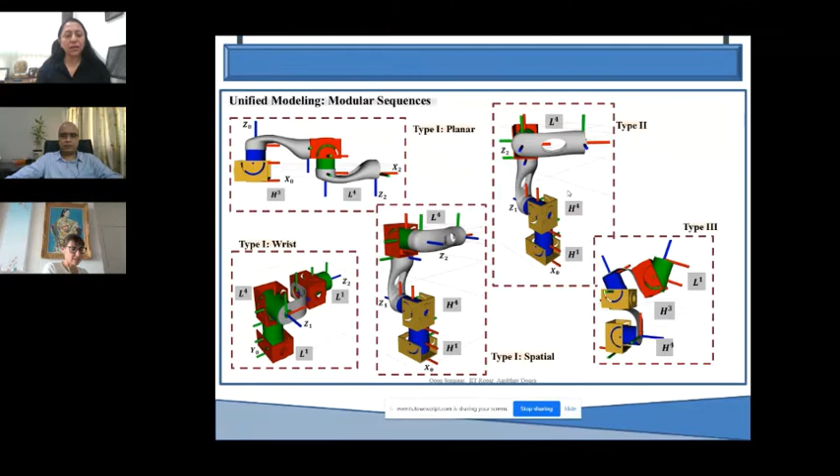Earlier we were not using a standard robot operating system like ROS, but for the last two years we've made it a point to make things more standard. Using URDF files and these standard platforms, we have now developed these arms and modular systems, where anybody can utilize it for given DH parameters and modular systems.

If we know what exactly is required to be assembled, then we know which modules will be able to do it, since the limits are already planned. So everything is done, and after that, for a particular complicated task and environment, it actually develops one system.

And in fact, if you want to assemble on your own and get your modeling, both kinematics and dynamic modeling for the system you've developed, that unified modeling is also done through this standard operating system, ROS, so that it can be utilized as open source by other people working in the same area.

Just to show you this glimpse, in one of the case studies we tested a few scenarios where we see how the same modular system can be utilized.

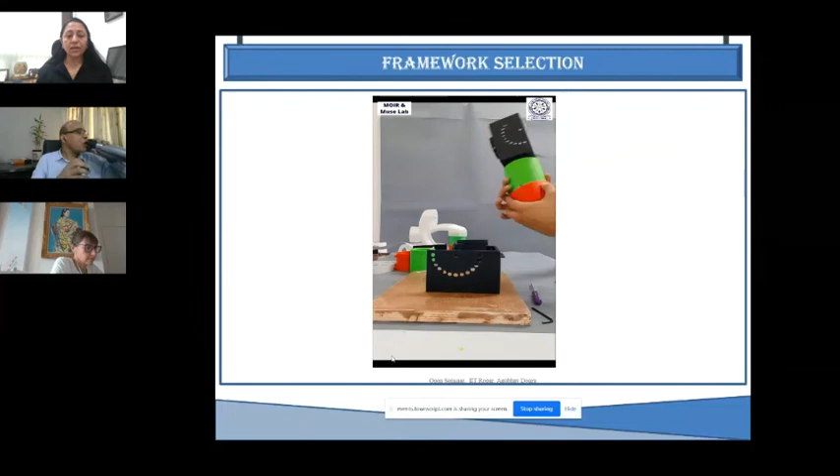The entire idea is that using this work, if we get any realistic problem or environment, we can scan it, get the environment, get the robot design ready through our design algorithms. Then once we know which DH parameters or which modules are to be used or assembled, it's straightforward to do the demonstration in our present version.

So this is our second version, which we are trying to show at different configurations. I'm just fast forwarding. Okay, it's anyway going. These are all 3D printed in the institute itself.

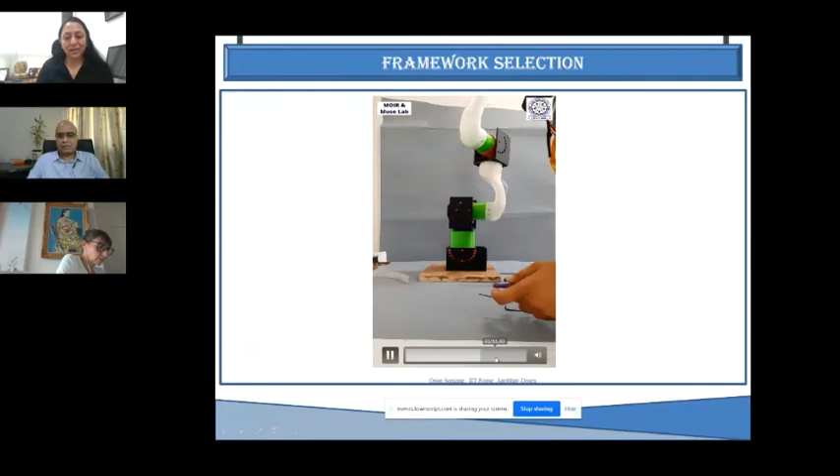So now we are collaborating with one or two industries to look at the shortcomings and what next we would like to work on with our Mark III. One or two industries have shown good interest, and it will be good for us to move further, after collecting feedback, because we would like to increase its strength also for the payload capacity, etc.

You'll see that similarly, the person showed this one configuration, and now the configuration will be changed.

So here the alpha is now neither 0 nor 90. Now the alphas are working at different values, so that we can work as required for unconventional systems in cluttered environments.

I'd also like to mention that in totality our groups are working in modular synthesis itself. Earlier the works I've shown were mainly in the area of serial arms, which we are also connecting to industry for, where we know that because of a change in environment or any new system, suddenly you would like to change the robotic configuration. So there we have connected.

Similarly, not only serial, another student of mine, Sakshi, she's part of Punch Robotics, and we are working with modular synthesis not only with serial but with loops also. We see how we can use modular primitives having a 4-bar loop or 5-bar loop, and then connect them together with serial. So we have developed a modular system in which serial and parallel loops can be connected together.

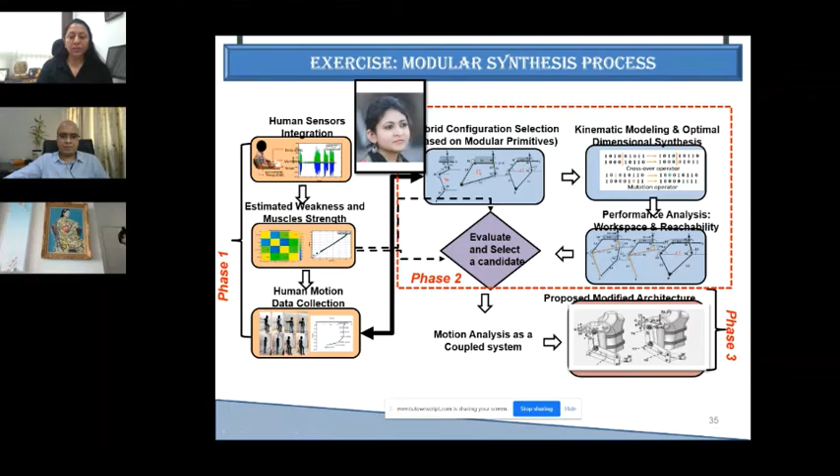At the back, we are also working on the coupling to improve on the misalignment. So I'm mentioning some of the recent work we are trying to do, improving on the architecture and particularly the motion, using some passive joints also at the back. When we use all these hybrid systems, we also explore many systems that sometimes don't come into our mind.

So what we do is we also have another work where you start from just generating the different architectures using the primitives, and then we see how the same automatically, using our algorithms, we will see which are the active and which are the passive joints. From there the automation in kinematics and dynamics—in this we have just developed the kinematic model, using the performance criteria.

Performance criteria will be computed automatically, so that we can actually compare among the different generated configurations. This is helping us now because in this rehabilitation work we have used 3 or 4 configurations where no designer needs to start from scratch with the models. These unified modeling techniques using modular primitives help us quickly analyze the different mechanisms developed using the modules, and then we can see if they can reach the task plan, because these are the points.

For example, just symbolically I have shown here how, if it has to reach these points which we have gathered for task planning from human motion that has been taken, we can see which particular configuration is working better. Of course, at present we are working only on kinematic analysis or kinematic performance, and even in that it is helping.

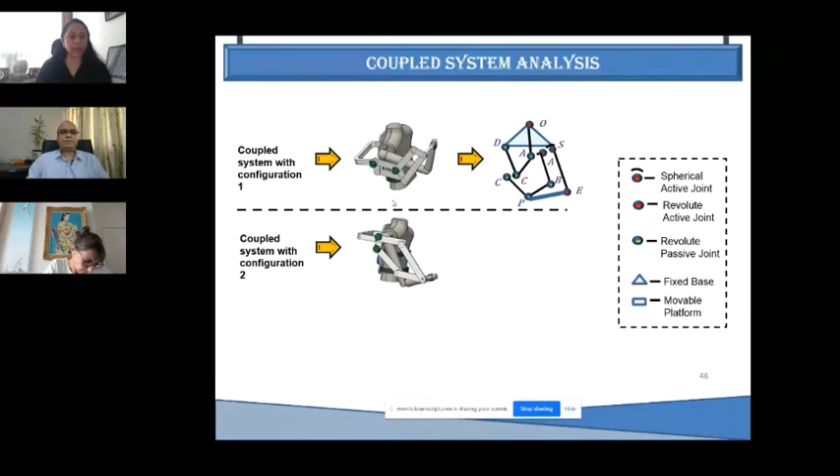So we have used screw theories and tried to give the entire mechanism as unified models for the coupled analysis. Here I'm just summarizing the entire process of this recent work—from the last 2-3 years—where we have tried to give only the model and the simulation, where we take data for a particular person and then use that to estimate their strengths.

A quantitative model was also given by the student—this model helps us quantify how much torque is required, given a particular strength, so that which exercise and for how long it is required can also be given a priori without the help of any expert.

This is also to assist the experts, because as I said, we are working with some experts in Delhi. They say it will be helpful particularly for training the next experts. So given a particular trajectory of a human arm, we can work on the different primitives to develop a system suitable for that human person.

We also do some workspace analysis, because it's not that it will only be helpful for that particular trajectory—we have to check the performance around the entire workspace, and then develop the particular system. So here too, I would say it is almost towards customized robotics.

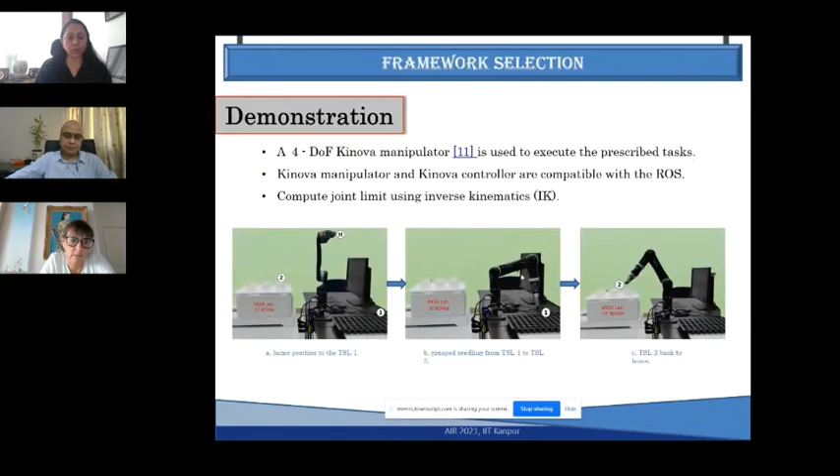For each module, what I have shown here is one module concept, and for each modular the library will be able to work, and then it will shift its base and work for the next. So all the processes required, related to seeding or transportation, we are working on what different grippers are required. We are also working on different end effectors required for the purpose, for example, just one shown on the right side here.

But yes, this is again in the initial stage, and just recently, a few months back, we made an experimental setup. I've not included it here, but I'm showing how we are trying to give customization or modularity, because all this we are testing to begin with only with the Kinova robot which we have. But as I said, our vision is to look at the modular library which can take care of many agriculture processes.

But only for the vertical farms, because the choice of plants will be very specific, right? So it's not field robotics, not really heavy duty.

Finally, I would like to mention here the modular concept, because different people were working in different directions, so we were clubbing together how exactly their expertise can be useful. I've mentioned agriculture at the top, but actually it is into surveillance, because we would like to give some robotic skin for establishing camouflaging devices, and to follow how natural camouflage works, we are using electrochromic devices at present.

Some of the research related here: Professor Prabhat, who is into materials, is working with me, and Dr. Anupam Agrawal is helping, using his additive manufacturing skills, particularly what I worked on earlier for agriculture and for modular robots. And we have Dr. Shrikant from aerodynamics. So different people are working on this. I've not included their pictures here, but this is how their expertise in materials we are trying to put up for the surveillance sector.

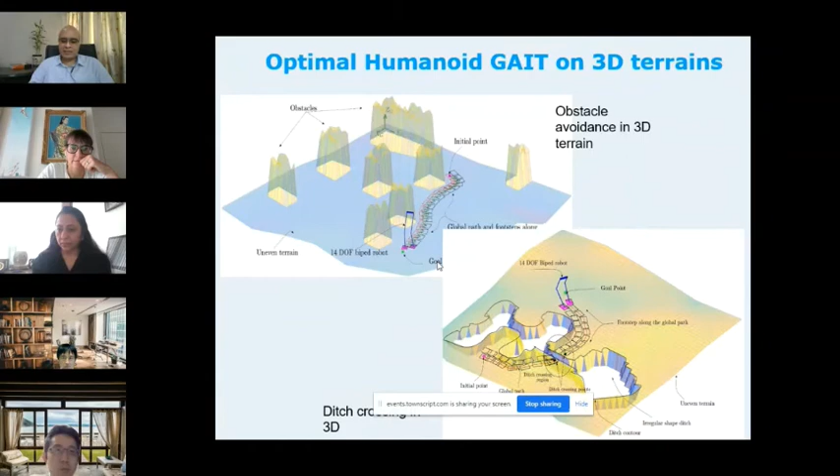Most of the bipeds or humanoids that exist are very good as far as they work inside the labs, but the moment they come outside, we have trouble. So we're also looking at how to bring robots out into the environment, not only structured but also unstructured environments - for example, three-dimensional terrain, walking in places with ditches, crossing obstacles, etc. This is extension of humanoid gait planning and motion planning in 3D.

Now, we were also a part of the lunar rover mission. ISRO is the Indian Space Research Organization, and in 2019 they had sent a rover to the moon. We were involved in that in terms of motion planning for the rover. The rover is a basic rocker-bogie type structured system with a manipulator on top, and our job was basically to do the motion planning algorithms for this rover.

So we also built a rover, carried out various studies on dynamics, motion planning, and control, and then some of these were actually tested on the actual rover. This is motion planning for the ISRO Chandrayaan-2 lunar rover.

Now, there are some interesting problems here. The interesting problem is that the landing was expected to be on the dark side of the moon. On the dark side of the moon there is no light, so you need to see at night or when there is no light. Cameras won't do. So the other task we were interested in is how you can make a map without using vision, computer vision.

What was done there is we tried to use structured light. This is a lab model - not the rover that actually went, but a prototype. What we basically tried to do is use structured light with a line laser, and then using a camera, scan the surface and generate a map so that you can see in the dark.

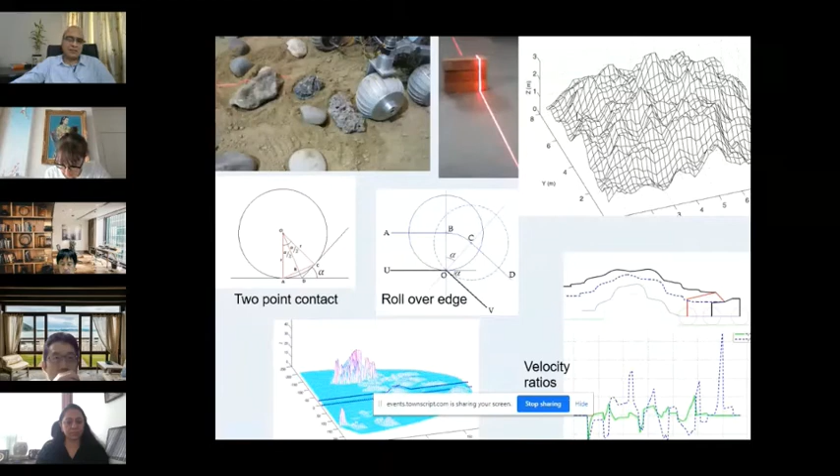Once you can see in the dark, then you can do motion planning of this 14 degree-of-freedom system to go from one point to another point. Of course, you have to do dynamics, control, and simulation. So we used a 3D structured light approach for this, and we were able to generate maps which you could actually see at night or when there is no light.

Unfortunately, while landing on the moon about 2 years back, the lander crashed, so we couldn't test our motion planning algorithms and visual generation algorithms. Next year, there is a joint mission between Indian Space Research and Japan Space Agency to go to the moon, where the lander will come from India and the rover from Japan. I think that is planned for this year end or next year. So this is about our studies on lunar rovers for motion planning, dynamics, control, and vision-based navigation.

Now we also do work in the area of rehabilitation, mainly for stroke rehabilitation. That is, you look at various motions, like grasping, moving the fingers, the hands, the legs, and then try to design mechanisms which can give you back that motion.

This is some research we had done for design of hand exoskeletons. Professor Shibata was also included in this project. We started off many years ago, almost 10 years ago, and then we have progressed quite a lot. Now the objective is to study human motion and then build mechanisms which can give you back that kind of motion, essentially because we have a varying instantaneous center of rotation.

The hypothesis of this study was that if you're doing passive physiotherapy, that means the person is doing exercise with a physiotherapist, but the person is not thinking, which means the brain is not engaged. So if you can force the person to think and bring it in sync with the physiotherapy or the physical practice, then our hypothesis says the recovery is going to be much, much faster. That is basically where we started off.

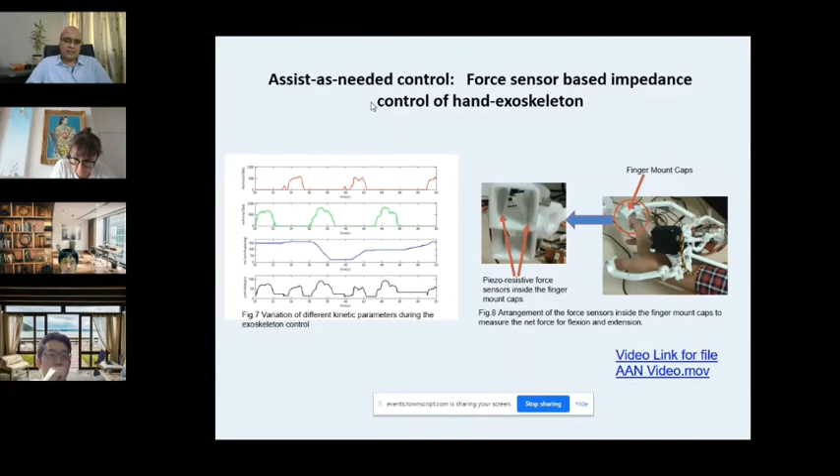Now we carried out clinical trials in India and the UK, and the results were surprising. We know that for stroke, basically after 6 months or 1 year, you are not going to recover anymore. You do physiotherapy for 6 months or a year, and then you're saturated - beyond that nothing happens. But we took patients who were actually saturated after a year, more than 1 or 2 years, and we carried out this exoskeleton-based rehabilitation, and we found that 100% of them recovered, which is not possible with physiotherapy-based treatment. So these are some results of the experiments in India and the UK.

And we have finished clinical trials. We are going in for large-scale trials now, where we want to try out in different countries to see the effectivity on the stroke population. Now in terms of cognitive science, these results show that there is recovery, but why is the recovery happening? Is it that the neurons are regenerating, or is there something else happening?

And this is what we found, that the recovery is happening not only because of neural reorganization, but also because of new pathways which are being generated from other parts of the brain to help. So we are looking at the engineering side, design, recovery, physiotherapy, but we're also looking at the cognitive sciences, trying to study why the brain is behaving this way, or what is really happening at the brain level.

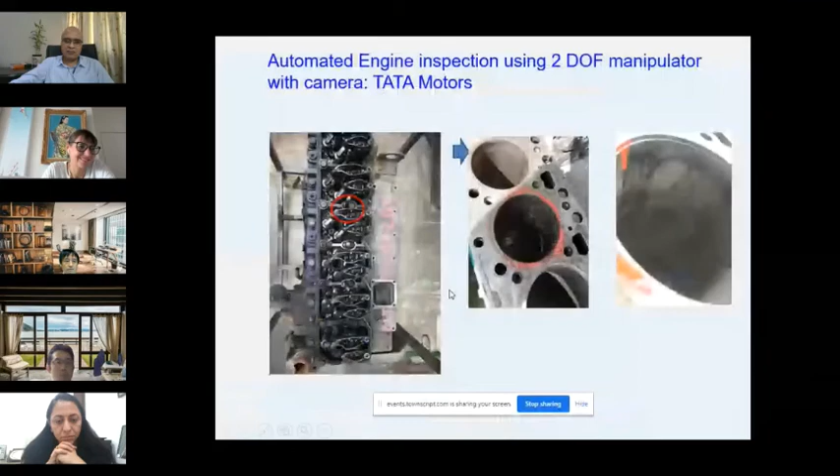So we have a very small probe, and this probe contains a camera and has LEDs to provide light. This camera-based probe is inserted into one of the holes. On the left side, you can see the engine is not open, but you can access it from the spark plug. They can insert it there, and this automatic system can rotate and get the image of the inside of the piston.

Now, based on this image, can you tell what is the state of the cylinder of the engine? This means without opening an engine, can you do it in 5 minutes and tell what is the state of the engine of the car? So this is some kind of AI-based or machine learning-based application using computer vision. This has been sold, I think, to Tata Motors, and they are trying to use it in their truck business.

In terms of aerial robotics, we have winged aircrafts. Then we have helicopters, and then there are a cross between helicopters and winged aircrafts. And the aerospace department, which is very big here, looks at the complete range from design, simulation, modeling, then motion planning, vision-based control—the full gamut of expertise in this area.

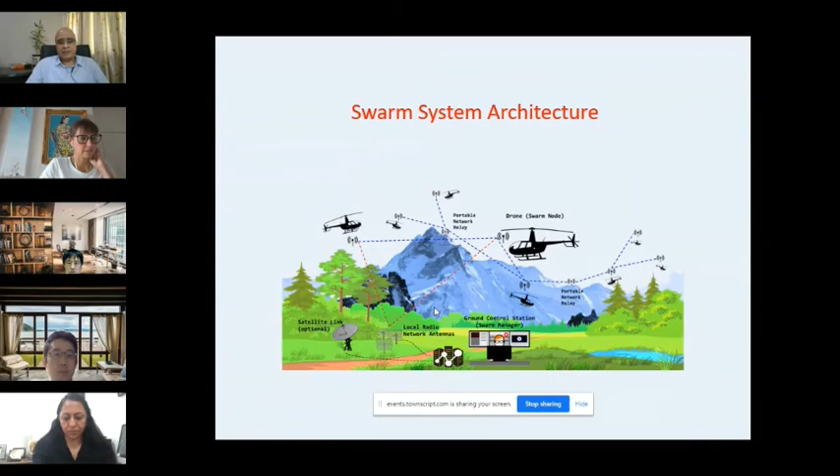The other area we have been working on is micro robotics. At the micro scale you need to make devices. There is a National Center for Flexible Electronics where they make micro devices, sensors, small robots at the micro scale using flexible electronics, printed electronics. We are also working at the micro scale where we can make very small devices, very small linkages for robots and users, for example making micro holes, micro sensors, which are used in robotics applications. I think my time is up, so I will stop here. Thank you for your attention.

Yeah, so I was the last speaker, so I thank myself. Yes, I did. Thank you. Okay, so I will stop sharing.

We can have a very short discussion. I think we had a long morning and a long afternoon, so we can have a very short discussion and then end the workshop session today. At the very beginning, I'd like to echo what Yamazaki sensei said this morning, that he was not very sure what the objective of this workshop is. I'll echo that and say I was also not very sure what the objective of this workshop is. I think none of us were sure. But as there is an old proverb, a long journey begins with a single step. I think this is the first single step, that at least we know you're there and we are there, and we can have some kind of long journey onward, right?